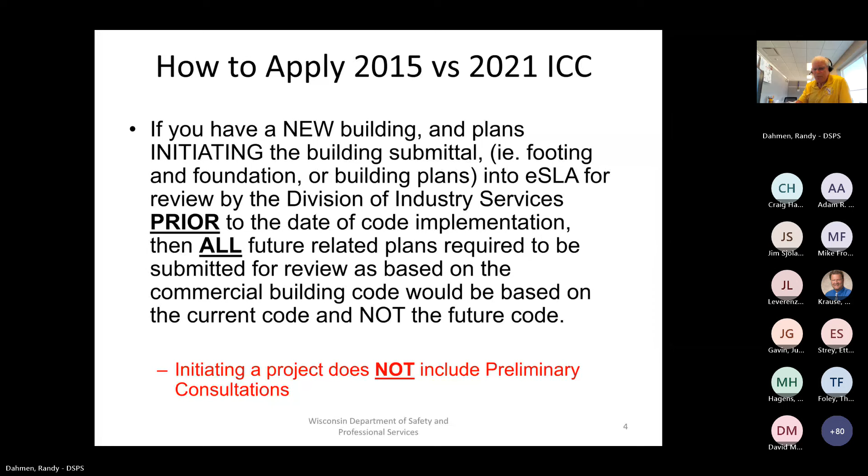As I said, if you get in before October 1st with a complete plan initiating the project, everything that ensues will be under the 2015 code. You can see here that HVAC, kitchen hoods, precast, truss, lighting, fire suppression, fire alarm, even if submitted or addressed at a later time, would still follow the 2015 code.

Now there are scenarios where you have a shell — a simple box. We're going to build a box, not sure what's going to go in it, but we're going to build a box. Those plans, as submitted to the department, will be based on when we receive them, and we'll assume it's 2015 unless told otherwise, if it's before October 1st.

When the building starts getting finished out on the interior to accommodate new tenants, the tenant plans will be addressed by the code in place at the time those tenant plans are received. So if I submitted the building plans for the shell on September 15th, we went ahead under the 2015 code, and we complete our box or shell.

Come December, we got our first tenant and the tenant plans come in. Well, those plans are after October 1st, so those plans fall under the 2021 code. All the ensuing plans related to that tenant space — building plans, heating plans, maybe sprinkler and fire alarm plans, truss, whatever it may be — anything related to that particular part of the project would then fall under the 2021 code.

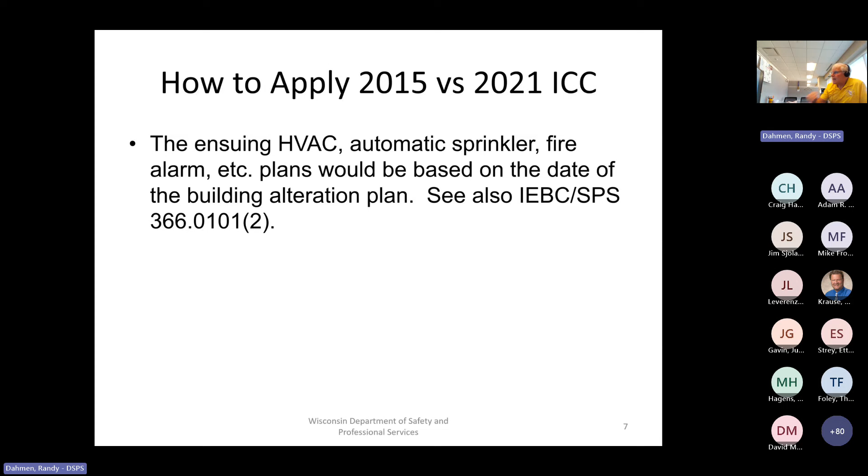Now we still have some situations where you have standalone plans. Like for instance, you might want to change out your heating system — you're not doing any changes to the building, it's strictly a heating system replacement. Or maybe the fire suppression system is going to be modified, or the fire alarm system is going to be updated, say at a school.

So if you have a standalone plan where there's really no building-related or other project related to it — I'll use a kitchen hood as an example, where you're adding a kitchen hood to an existing building — it's a standalone plan. When we receive it, if it's before October 1st, we will assume you want the 2015 code and we'll apply the 2015 code for that review.

If you submit it on October 1st or later, the 2021 code will be applicable. Again, in the month of September, there's this kind of gray area. If you want to go to the 2021 code, you certainly can — you need to identify that when you submit your plans, and we'll review it based on that 2021 I-code.

Now, if you have the code books, if you're not familiar with the I-code books — basically, if you see a solid line, there's some technical changes that were made. It could be big, it could be small, but there was something there to keep your eye on as you open your I-code books.

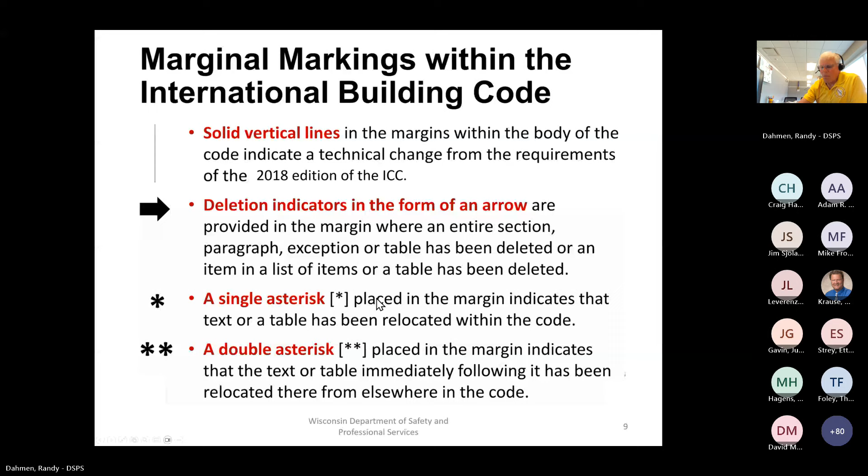As we move into the 2021 codes, you need to have the right materials at your disposal. Depending if you're a building designer, a heating designer, etc., things are going to vary. Of course, you're going to have sprinkler designers, fire alarm system designers, truss designers, on it goes. So the first thing to have is obviously just have the books: 2021 ICC, IBC, all the I codes, and the IFC, the International Fire Code, as referenced.

We'll get into the application of the International Fire Code a little later. The amendments, which we're going to talk about, will be in 361 to 366. I will say a final version will not be available until September 1. You can find preliminaries, but they are just that—preliminary, just like this presentation is based on the preliminary. It is not the final because we don't have a final yet. The department doesn't have it.

It's with the LRB. Now, the next item is the ANSI A117.1 accessible and usable buildings and facilities. I greatly encourage you to get a copy of this. The size of the bathrooms have increased—imagine that, they've gotten larger to create greater accessibility. This is an important issue when designing buildings because most every building has to have a toilet room, with few exceptions. So if you aren't aware of the new size and clearance requirements for bathrooms, you really need to get a copy of the accessibility A117.1 2017 because there's some significant changes in that standard.

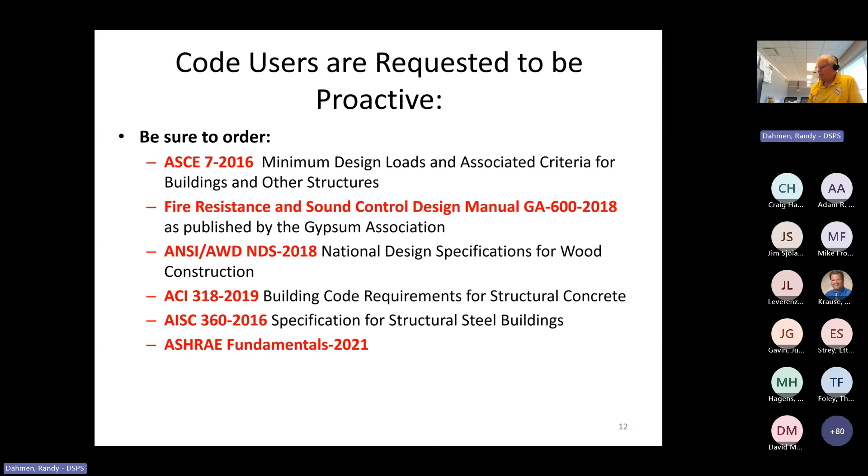For those of you involved in building envelope and insulating a building, we have recognized ASHRAE Fundamentals 2021. So if you're unsure of the R value of a wall assembly or a ceiling assembly, some baselines as to overhead doors and windows and justifications for that - ASHRAE is a wonderful place to go for series parallel methods in determination of R values of various assemblies.

So those are the materials that would be very handy to have. I would almost say essential in some of the efforts that you as designers and contractors perform.

There is some licensing that came with this adoption, directed to those who perform inspections relating to fire detection, prevention, and suppression devices. Typically these licenses have been obtained by fire department officials, so usually a fire department official is not necessarily a commercial building inspector, but because they go in on their yearly inspections on behalf of the community...

...to verify existing commercial buildings and their compliance - making sure exit lights are lit and properly located, that there's clearance in front of the electrical boards, that the doors have operational hardware, and in some cases verifying fire dampers, smoke dampers, etc., all properly installed and properly maintained.

So this new license under 305-627 provides them the opportunity to verify and do inspections while they're performing their yearly fire verifications, as well as those who are commercial building inspectors who can also verify those various fire assemblies.

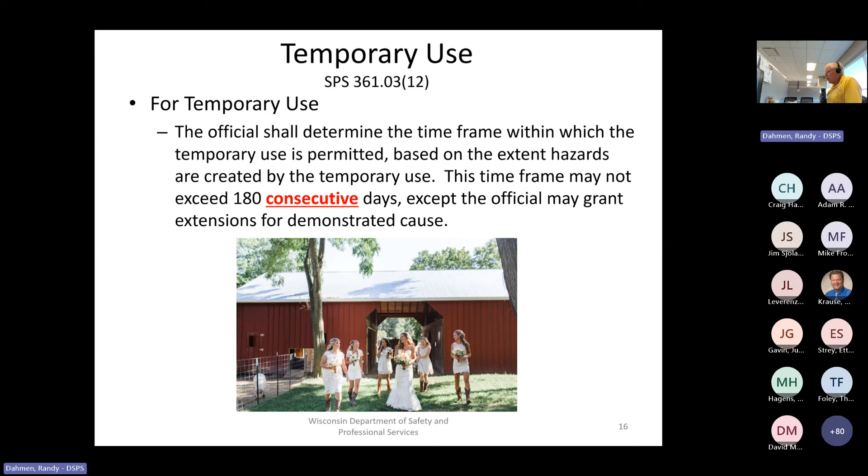The International Fire Code - now, we don't necessarily adopt the International Fire Code per se, but you'll notice I made reference to it. What's important is that if there's a directional signal, and there are many in the International Building Code that reference the fire code, you're obligated to use the fire code if that section says you can.

This is an intermediary location in the code, 36103 parens 14, that before going from the building code and applying the fire code, you have to see if that section of the fire code has been recognized, for instance, as it involves design and construction, or occupant loads, or other sections. So you'll find in the building code, if there's a reference to the fire code, you go to the fire code, find out where that discussion is held, what chapter, and come back to this section to see if that section of the fire code is listed. If so, you're obligated to apply the fire code.

I can give you one example for many of you involved in very large warehouses. If you have high piled combustible storage over 12 feet, that's addressed under 413 of the building code, and it tells you to go to the fire code. You'll find that this section does identify that section of the fire code for use in design and construction, and thus design professionals are obligated to design their commercial building to include the design and construction requirements of the fire code. A lot to say there, but hopefully you grasped it.

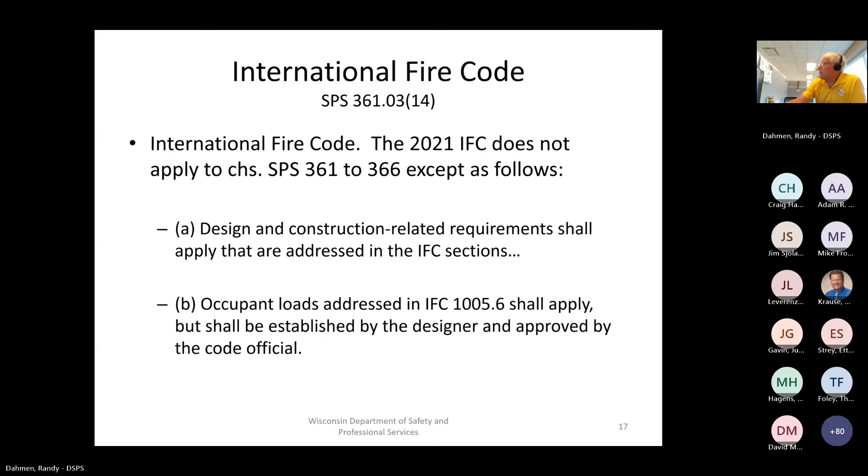Moving ahead, construction inspections and reports shall apply, as addressed in the IFC - remember, that's the fire code - so they're into inspections and reports. Note that the department has added that it may be performed or compiled by any qualified agency rather than by a special inspector. The ICC code has licenses at the national level that they provide for those qualified for special inspections.

Many of you have known that since the adoption of the I-Code since 2002, we have typically omitted the special inspection sections of the code.

Moving into the 2021 adoption, Chapter 17 of the International Building Code, which addresses special inspections, is now included with the adoption of the 2021 codes.

Now, it's always been a chicken or the egg kind of thing - do you create licenses for professionals but not have code language to justify their use, or do you create code language and then work on the licenses on the back side? In this particular case, with the adoption of Chapter 17, we've created the rules, and at this time we will be looking at individuals who are qualified to perform those actions.

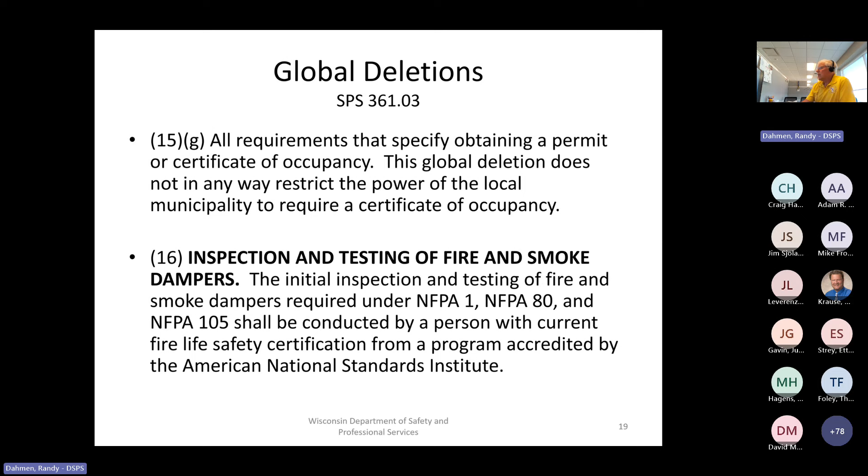Inspection and testing, as it involves smoke dampers, fire dampers, ceiling radiation dampers - all those wonderful dampers out there - are all under NFPA 1, NFPA 80, NFPA 105. It needs to be conducted by a person with current fire life safety certification from a program accredited by the American National Standards Institute, the ANSI group.

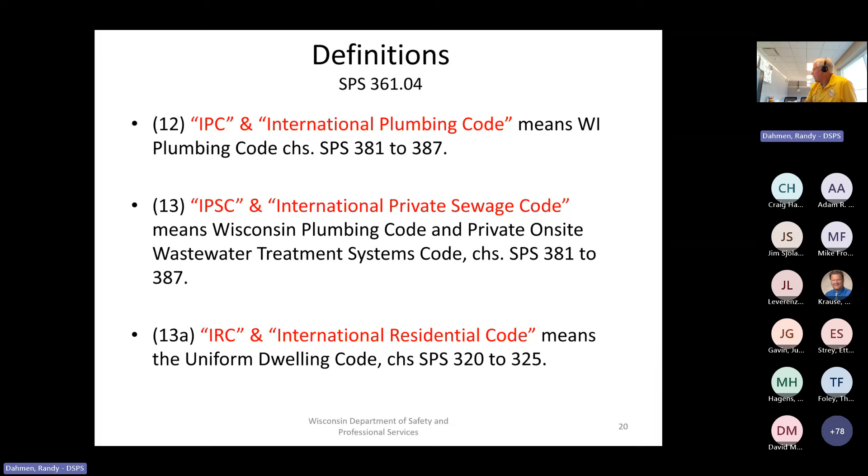Just to clarify, anytime you see in the building code reference to the International Plumbing Code, we don't adopt the International Plumbing Code. So by definitions here in our state and in the Commercial Building Code, we're referencing the Wisconsin Plumbing Code. If you see reference to the International Private Sewage Code, again we're looking at the Wisconsin Plumbing Code and the Private On-Site Wastewater Treatment Systems Code. And if you see reference to the IRC, the International Residential Code, the intent there is to be referencing the Uniform Dwelling Code here in Wisconsin. So just keep that in mind as you review and apply the Commercial Building Code.

Definitions: one of the new pieces of language is modular commercial building element. Many of you are aware of modular buildings. In the past, the state statutes actually had multifamily buildings and commercial buildings separate, and they were treated as two separate codes. Several years ago they combined the two to treat it as one, which is the way we enforce it anyway. Our former language had basically the commercial buildings and the multifamily - they were very similar in that they were almost mirror images of one another. What we did this time around with the building code is we combined them both and expanded and clarified the modular commercial building elements as to what's required, how to address them, etc.

Lastly, multifamily dwelling - we have a definition in our state statute. So rather than looking at the International Building Code, we maintain the law of the state and reference the state's definition of a multifamily dwelling.

361.05 recognizes that the 2021 ICC codes as listed there are to be adopted for use in the state of Wisconsin, and they will be amended by chapters 362 through 366 respectively. So this is where the 2021 gets specifically identified and the fact that the amendments also need to be addressed.

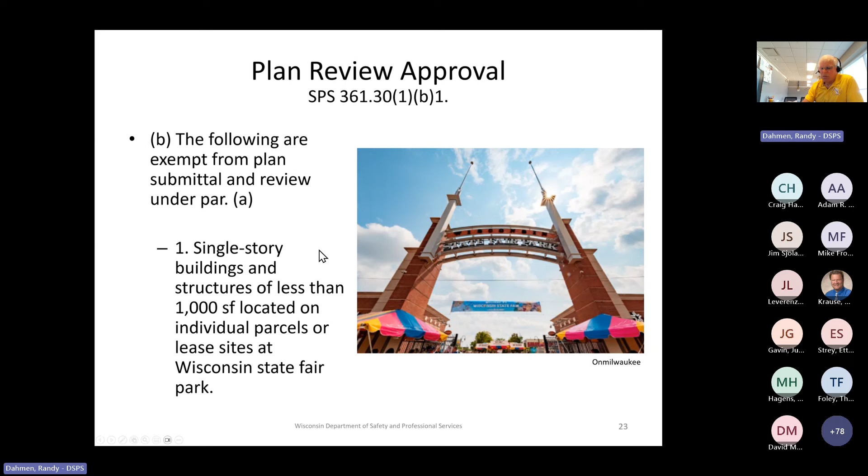Added to those exceptions is the following: a single-story building and structure of less than 1,000 square feet located on individual parcels or lease sites at Wisconsin State Fair Park. In this case, Wisconsin State Fair Park is specifically for the one in Milwaukee. So if you are working on that type of building down in the Milwaukee area, there is now this exception for you to apply for your project.

Permission to start: now, we really haven't changed anything about a permit to start. You still can obtain them. It still costs you $75. You need to submit a plan at the time of the request of the permit to start. It needs to be a complete plan. And note that a permit to start only addresses footing and foundation.

Don't use it to build anything above grade. You can't use a permit to start to put in heating equipment above grade. You can't use it to put in new fire suppression or fire alarm into an existing building above grade. No, no, no - the permit to start is for footings and foundations only. If it doesn't involve footing and foundations, don't get a permit to start because it's not applicable to your particular situation.

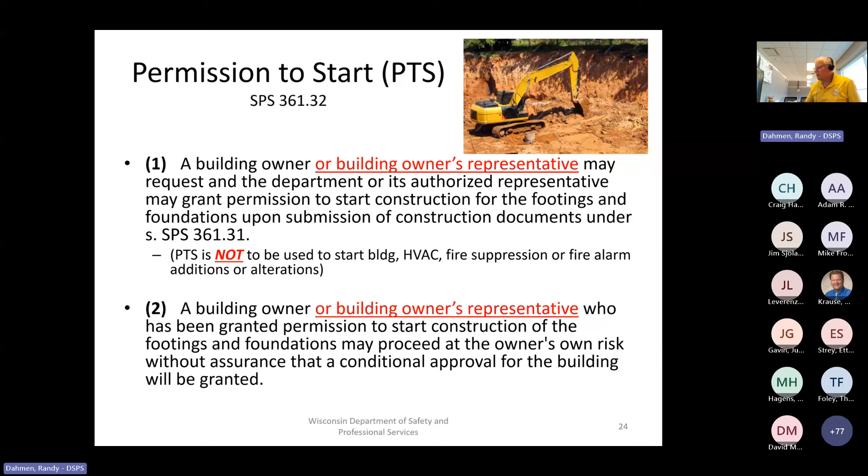A big one for many of you involved in system changes and alterations: instead of getting an approval good for one year, the approval for building alterations and related alterations—HVAC, fire protection, smoke detection, fire suppression—will be good for two years. So we're extending it from one year to two years for an alteration.

Now note, if you need another year, there is the ability to extend a plan for an additional year under 361.36(2). But there's no wiggle room here—you must notify the department before the plans expire. Don't come to the department after the plans expired and say you want to extend the use of this plan. We won't do it because there's no plan to extend—it's expired. You can't extend an expired plan. The important point is we're going from one year to two years for alterations as submitted to the department, starting with the adoption of the 2021 codes.

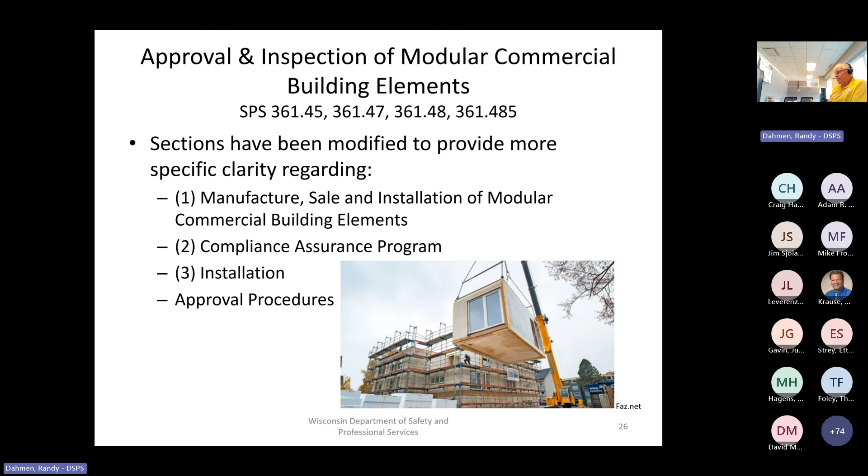You don't have to worry about the rain, 20 below wind chill, or any of the elements that go on the outside—you can build this in the factory. You throw it on the back of an 18-wheeler, get your crane, put them together out in the field, tie them all together with the appropriate fasteners, and you're off to the races. That's the value of modular commercial building elements.

Now when we adopted the 2015 codes, we had an addition that allowed the design group to choose to apply a more modern edition of the international codes. So for instance, if we were in the 2015 and you wanted to apply the 2021, 2024, or even 2018 ICC codes, this section would allow you to do it. Be aware, however, that if you want a more advanced or newer version of the code for application, you may not use any of the Wisconsin amendments—you have to apply the code as written, no exception.

We did have a few of these, that's fine. We clarified what the fees are for using an alternate code, and now we've identified that within the language here in the administrative portion of Chapter 361. So as you see, if you want a new approval to go to an alternate standard, the cost will be $1,200.

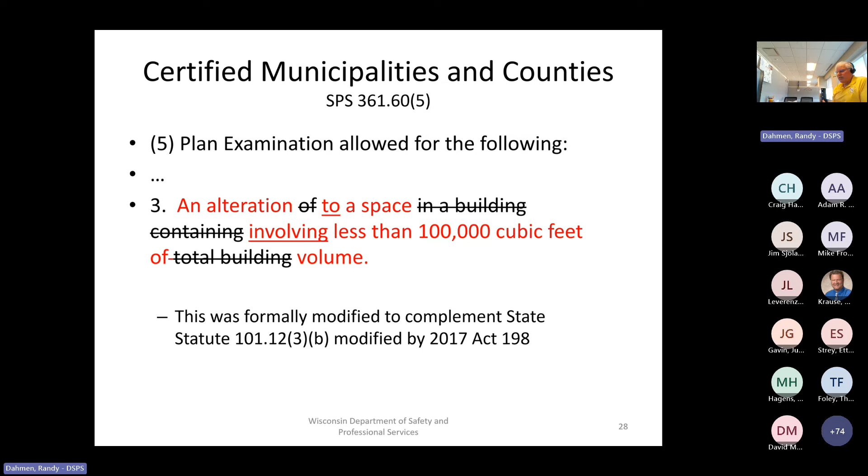The language here says plan examinations allowed. So if you're a delegated municipality, you're allowed to perform plan review as it involves an alteration to a space involving less than 100,000 cubic feet volume. This is to complement changes in the statutes as it involves inspection, and so the language was changed in the administrative code to complement the statutes.

The code now has new definitions for fuel burning appliance, high piled combustible storage, sealed combustion appliance, and a toilet room.

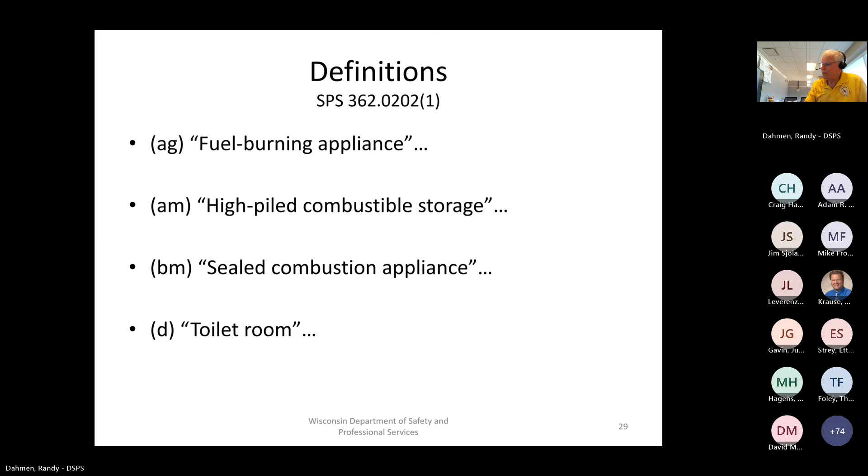There's always been discussion, especially when dealing with fire department buildings. Commercial motor vehicle has the meaning given in state statutes 340.01(8), but does not include a fire apparatus. And you're like, well, what's the big deal here? Well, if you have a fire department with multiple fire apparatus, a lot of fire trucks...

If you treated it as a commercial motor vehicle, then under 903.2.10.1, it would require that the building be sprinklered at 5,000 feet of fire area. If you exceeded that 5,000 foot fire area threshold, sprinklering would be required. Because of the recognition that the fire apparatus is not a commercial motor vehicle, that fire area could be as large as 12,000 feet without being required to be sprinklered. It takes on the persona of a general vehicle rather than a commercial vehicle. So that's the value of that particular definition.

Aircraft hangars, now we clarified the surface in those buildings. Floor surfaces shall be made of materials allowed by 406.2.4. And I'm sure you probably don't remember what it is, but in general, it requires that concrete or similar approved non-combustible, non-absorbent materials be used for the floor of the aircraft hangar.

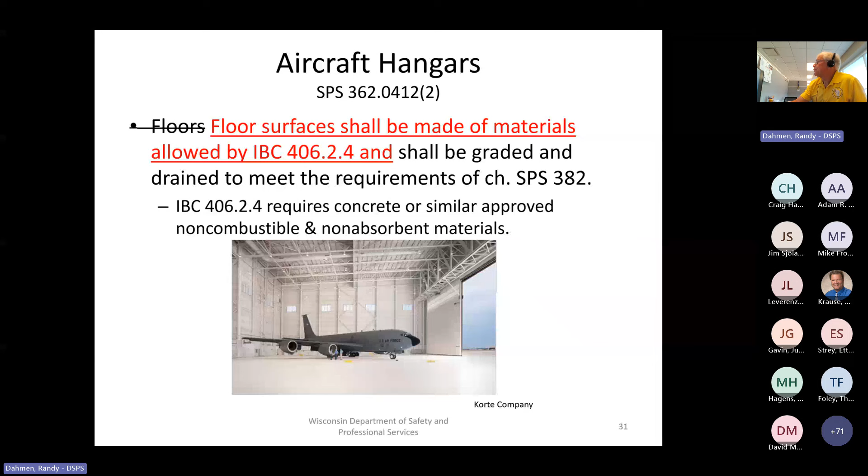This is an important change, and I don't think it's going to change the design at all. It's just a great clarification between the application of the Commercial Building Code and the application of the Uniform Dwelling Code. Again, the Uniform Dwelling Code is for 1 and 2 family dwellings. Once you get to 3, remember that definition of 3 tenants or more becomes a commercial building. Now you're in the Commercial Building Code. There are scenarios where the UDC and the Commercial Building Code butt heads.

I'll give you an example. I have a tavern on the first floor, and I have a single dwelling unit on top. This is very common in some of the old town main streets. Now, the shell of that building is technically under the Commercial Building Code. The finish out of the tavern is under the Commercial Building Code. It's either going to be a business occupancy or it's going to be an A2 occupancy if it has 50 or more individuals.

The upstairs, however, doesn't meet the criteria of a commercial building. The upstairs is not a place of employment. It's a one dwelling unit. So it's not a place of employment. It's not a place where the public egresses or ingresses, like a basketball forum. And there's not 3 dwelling units or 3 tenants in this building. So that tenant space on the upstairs falls under the Uniform Dwelling Code.

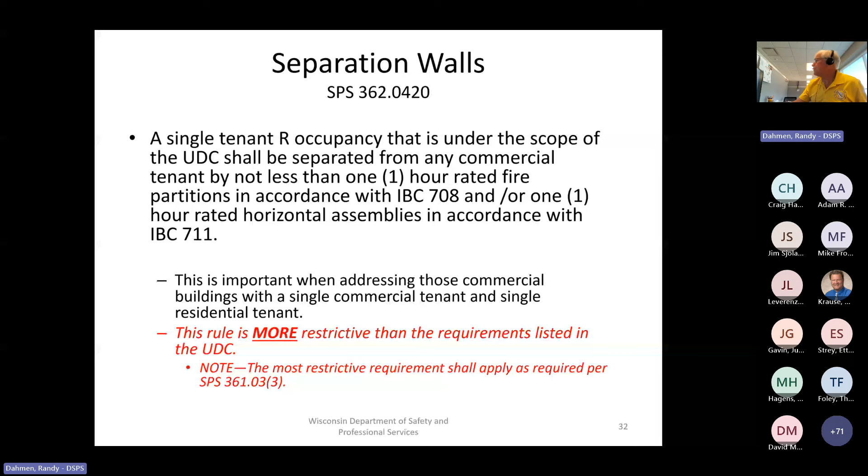We now have added another option for the design community. We've recognized it, we just didn't have it in writing, so we've now put it in writing.

Many times you get a firewall and you don't get a nice 180-degree break at the corner of the firewall. Maybe it's only 90 degrees. Then you have to do something more, and you have to comply with one of the following.

These two are written in the code. The first one talks about exterior walls on both sides of the firewall having at least a 1 hour fire rating with a minimum 4-foot extension on each side.

The second one deals with the idea that you're going to treat it as 2 separate buildings, put basically an imaginary lot line between the buildings, and then apply 705.8 for openings, etc., between the buildings.

Well, this is what's written in the code, and what we did is we added a third option. The firewall can simply be extended 4 more feet in one direction. And you say, well, we already talked about a 4-foot extension.

Yeah, we did, but that 4-foot extension is a 1 hour rating in 2 directions. The firewall we're talking about is going to be at least 2, could be as much as 4 hours, and you're going to extend that 4 feet in any one direction.

So let's see if this picture will help at all. So here's the first example. Here's my firewall. This is an exterior wall here. The firewall ends.

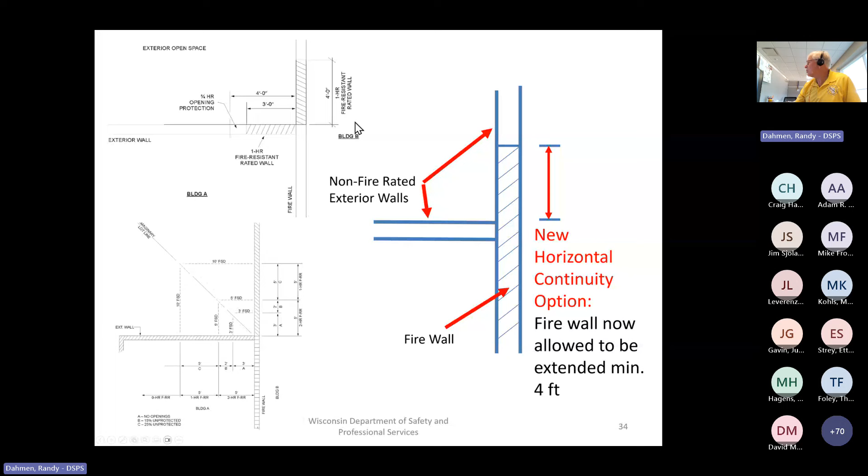I think the design community will like that. It's now been clarified and put into the code, and it'll be a value added, I think, in the big picture. For the heating guys, I haven't left you out.

There's an amendment that's been placed into the building code. It's more of a clarification, because the language just didn't address what's in the IRC—because we don't adopt the International Residential Code, we adopt the Uniform Dwelling Code. And because...

Nationally, row houses, townhouses, condos, and apartments are many times placed in the International Residential Code. We missed out on this and it wasn't in the building code. So we've now included it by Wisconsin amendment.

So if you have a building, say a townhouse, it's 3 stories. I put the furnace on the bottom story, and now I penetrate the floor ceiling assembly between the basement and the first, and then the floor ceiling assembly between the first and the second.

So we've got basement, first, second—3 stories. Well, the code as written technically says you need to have a shaft, even though it's entirely within the same townhouse. There was no exception written in the code. So we've created an amendment, and it says as follows.

Ducts contained within individual dwelling units may connect up to 3 stories without a fire-rated shaft. The annular space around the penetrating duct shall be protected with an approved non-combustible material that resists the free passage of flame and the products of combustion, i.e. smoke.

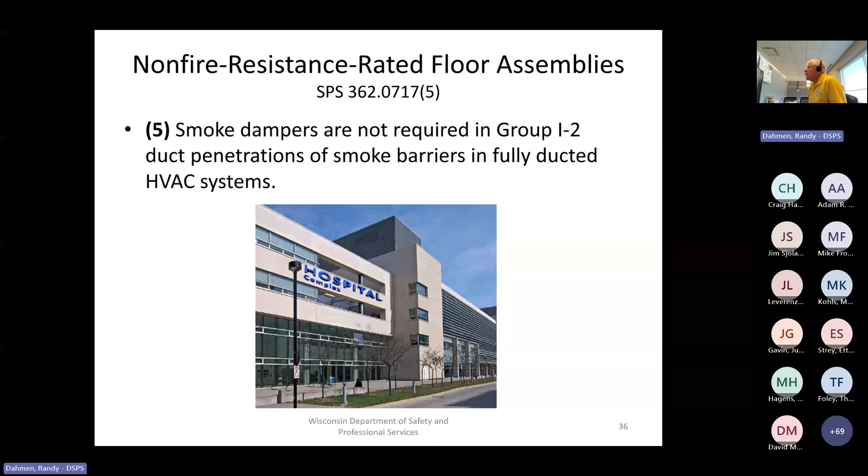Sprinklering language, as you know, we have a lot of amendments for sprinklering, and many of them were driven by petitions for variance. We had numerous petitions for variance involving rural located A2 occupancies, assembly occupancies for eating and drinking. We've also had exceptions for a lot of petitions for residential occupancies out in the rural area where it's very difficult to get the sprinkler system. There's some real challenges there. So we tried to accommodate some of those petitions and just put them into the code so that it's the same and we don't have to process them, and you know what the requirements are. So that's some of the history behind it.

There's also other reasons based on some actions taken here recently. The first one for discussion is the fire area containing an A1 occupancy has no stories that include a level of exit discharge. If you have this situation, you need to sprinkler the building. The fire area containing the A1 occupancy has no stories that include a level of exit discharge, you'd be required to have sprinklers installed. A1 is a performance area, like a theater.

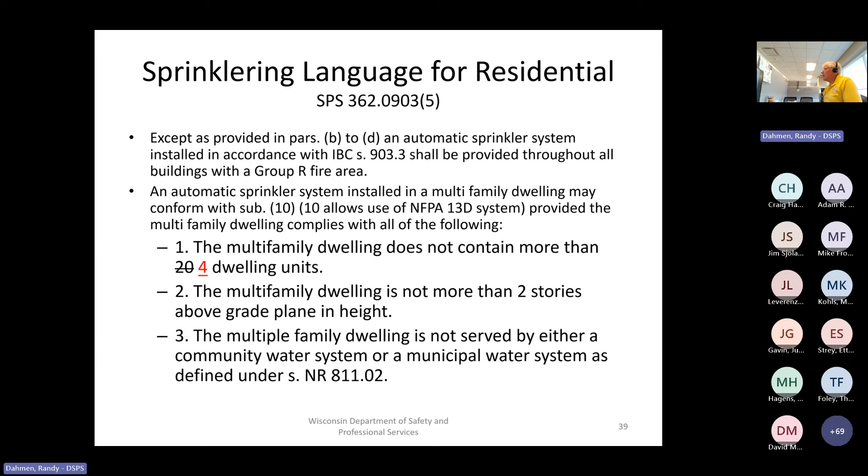Continuing forward, into more specialty types of areas, Group R-3 and Group R-4, Condition 1. Condition 1, by the way, is those areas, kind of a group home of sorts, capable of self-preservation without assistance. Those occupancies and townhouses meeting the separation requirements listed in 1 and 2 below shall be permitted to be installed throughout in accordance with a 13D domestic system. Now the 2 criteria are that a townhouse is 3 stories or less above grade, and that each dwelling unit within the townhouse is separated from other dwelling units by at least 1 hour fire-resistant rated separation per IBC 707, which is the fire barrier section of the code.

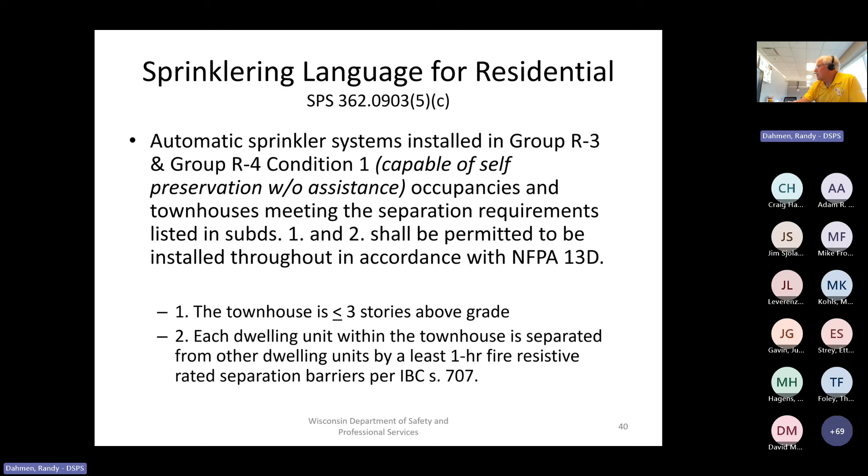There is now a recognition for townhouses. Townhouses meeting the definition in Chapter 2 and satisfying both 1 and 2 below may be constructed without a sprinkler system. Sounds like a good deal. So it has to meet the definition of a townhouse, and then it has to meet 1 and 2. First, the townhouse is less than 3 stories above grade plane - if you're 3, you cannot use this exception; if you're 1 or 2, you can. Secondly, each dwelling unit within the townhouse is separated from other dwelling units by at least a 2 hour fire-rated separation wall constructed in accordance with IBC 706, which is the firewall criteria. The separation wall does not have to comply with the structural stability requirements of IBC 706-2 - in other words, it does not need the breakaway roof and breakaway floor capability of a firewall.

Now, what's important about this is the note attached to it. Note, exceptions to sprinkler requirements found in 101.14 deal with the 2-hour separation of multifamily dwelling units. This section only applies to the sprinkler section of the code and does not affect other sections of 361 to 366. Why is that an important note?

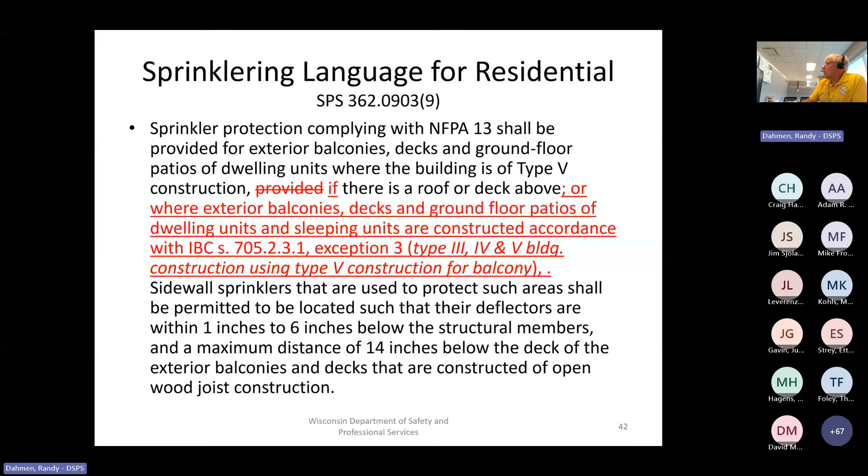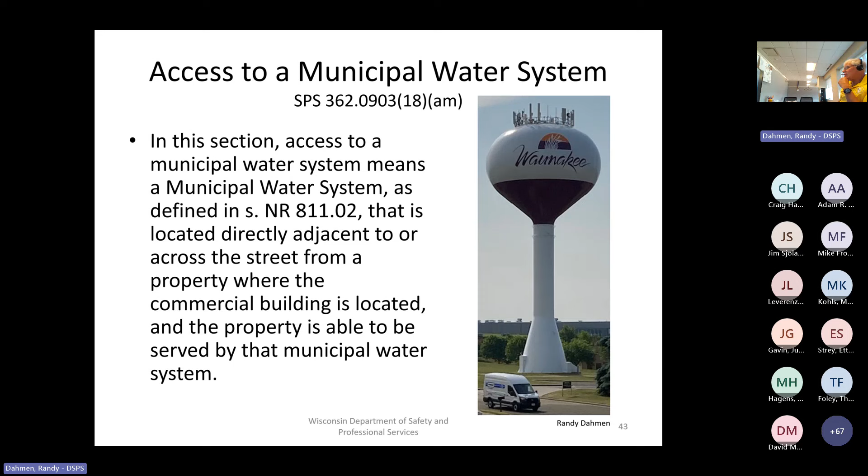For those of you who may not know the definition, there is a lot of discussion about access to municipal water in the code, because obviously if you don't have access to municipal water and you need to have a sprinkler system, that can be quite challenging. So we've defined what a municipal water system is, and if a municipal water system isn't available, we've provided some exceptions and requirements that can be used to meet those exceptions so as to not have a sprinkler system. This gives you some guidance as to what a municipal water system is.

Here's an example for an A2 occupancy. A2 again is eating and drinking. So if you're out in a rural area and you don't have access to municipal water, you might not need to sprinkler if you can meet all of the following. A says the building's limited to a single A2 occupancy fire area, and it can't exceed now 5,000 feet. Used to be 12,000. It's now been changed.

The occupant load has been reduced from 300 to 200. Building height, that language is still the same. Minimum of 3 exits, again, that language is the same. It was added, though, a 5th item: basements and windowless stories must still adhere to the provisions of IBC 903-211. And what that section says is if you have a windowless story, you must sprinkler that windowless story unless you meet one of the exceptions listed in that section.

So that's an add-on. This section is very similar to what it was in the past, but it has been changed, so be aware of it as you go forward with your design. In a similar fashion, instead of A2, we have some exceptions for the group R occupancy if you don't have municipal water.

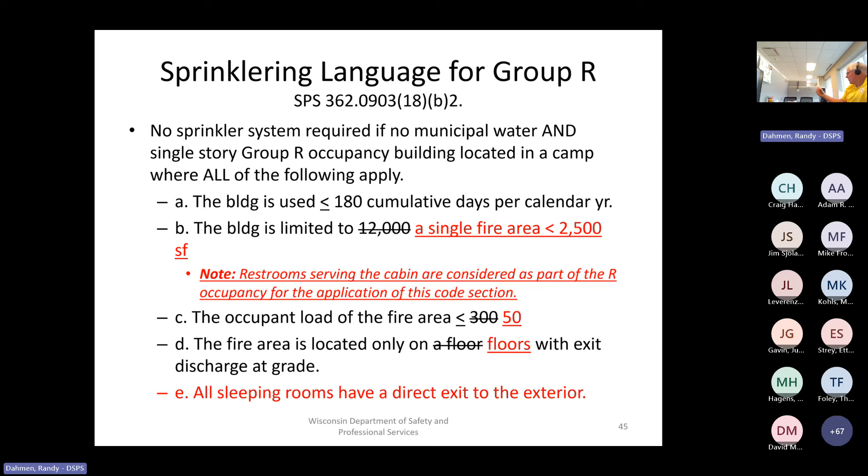The occupant load has changed from 300 to 50. Remember, we reduced the floor area from 12,000 to 2,500, so the occupant load was reduced to complement that. The fire area is located only on floors with exit discharge at grade, and in addition, language has been added requiring all sleeping rooms to have a direct exit to the exterior. So if there's a fire, they don't have to go back into the building to get to the exit - they can leave their sleeping room directly to the outside with a direct exit.

Additional requirements for exempted non-sprinklered buildings with no municipal water. If you choose to meet those criteria with non-municipal water, every one of them has to meet this paragraph C. It's an addition that's commonly missed - I'm telling you, don't miss it, because people like me then have to hold a plan, and I certainly don't want to do that. So this is an addition to the criteria we just looked at, over and above the occupant loads displayed, which isn't a big deal but is important when dealing with assembly occupancies.

All open flames, including smoking, shall be prohibited in the building and less than 50 feet from the building, except for flame equipment used to reheat and maintain food temperatures. Remember, we're not requiring you to put a sprinkler system into the building, so we have some prohibitions we don't want to see. For instance, if a church chooses not to sprinkle a rural building in the field, if they meet the exception, that's fine - but one of the criteria is they can't have open flames. There can be no candles.

Now there's been an addition of a note. In this section, open flame means a candle, solid fuel fireplace, or other similar flames. It does not refer to permanently installed listed fuel-fired heating and cooking equipment that was installed in compliance with all applicable building code requirements in effect at the time of installation. So we've clarified what all open flames means, because there were a lot of different interpretations of the intent. Open flames include candles, solid fuel fireplaces, and other similar open flames.

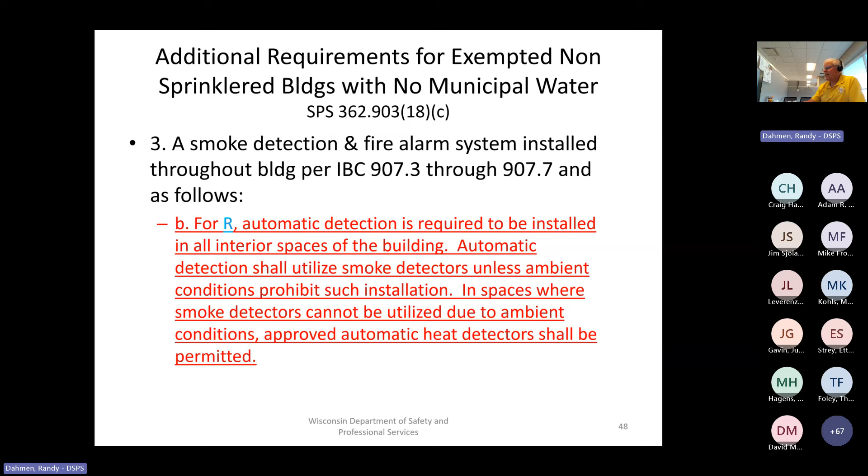Now that was for an A2. This is for an R residential - it's very similar. Automatic detection is required to be installed in all interior spaces of the building. Automatic detection shall utilize smoke detectors unless ambient conditions prohibit such installation. In spaces where smoke detectors can't be utilized due to ambient conditions, approved automatic heat detectors shall be permitted. So again, just providing you some insight and filling in the i's and dotting the t's.

Other items are also required when you choose not to sprinkle the building and where no municipal water is available - you need to have your fire extinguishers.

When the plans are submitted, you need to have a form. Imagine that, the state of Wisconsin with a form. But we do have a form. And that form needs to be signed off by the fire code official if there's no commercial building inspector for the jurisdiction. That sign off recognizes there's no sprinkler in the building, and it also identifies that there is no municipal water available.

Now, if the locals don't feel that's appropriate for whatever reason, the representative, whether it's the building code official or, if there is no building code official, the fire code official, can make a comment on the form and say they don't believe this should happen due to concerns for life safety. That form, as signed by either the building or fire official, needs to be accompanied with your building plan submittal. If it's not there, we'll hold it because we have to have that.

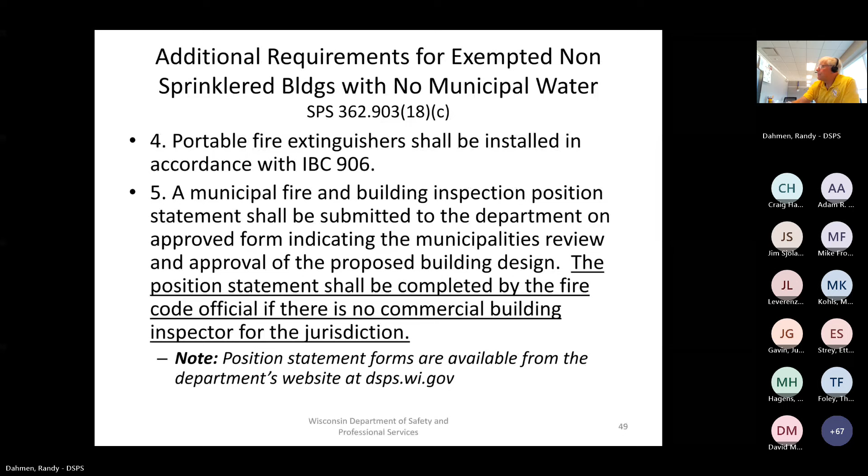Some other items of note that actually reduce the application of the code: stories without openings. Take a basement - a lot of times there's no opening, maybe just a single door on the far end. Code doesn't like that, because the fire department doesn't have access to spray their hose of water should there be a fire event.

There are exceptions where if you have openings around the outside of the story without openings, you would not be required to sprinkler that particular story. We've added another exception that windowless stories with all required exits provided directly at grade, when the story is located at or above grade, would be exempt from needing a sprinkler system. Jim Michak sent me a picture of a recent membrane building - needless to say, they don't have windows per se, but they do have exit doors around the building, and if it doesn't meet the exception written in the code, it might be able to meet this exception.

Woodworking operations - it really hasn't changed anything. It's just to clarify that the 2,500 square feet referenced in IBC 903.2.4.1 is the size of the woodworking area, not the size of the fire area. The fire area could be up to 12,000 feet for a factory before a fire suppression system would be required. Within that 12,000 feet, you could have woodworking occurring in 2,500 square feet without requiring sprinkler. Now, if it's 3,000 of the 12,000, even though the 12,000 is less than the total fire area allowed for a factory, if the woodworking exceeds 2,500, you still have to sprinkler the space. So it's the area in which the woodworking is occurring, not the fire area in which it's occurring.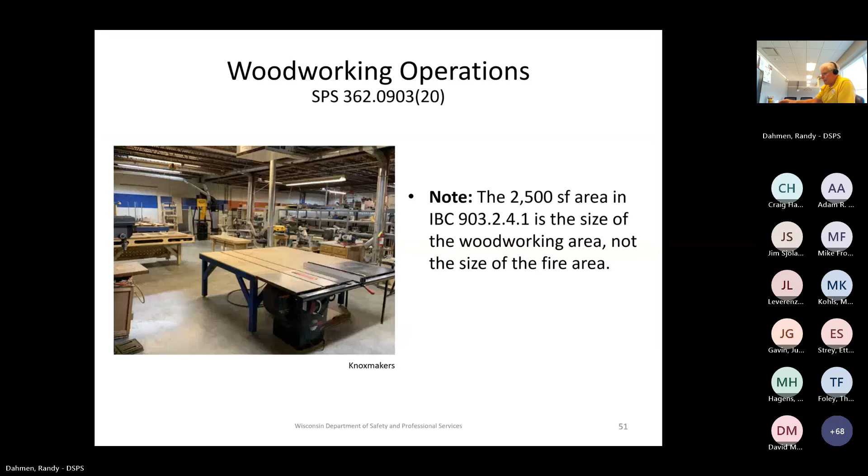We now have language for boat storage, where you take the boats and put them on a multi-layer rack system for the wintertime, out of the water. The language says an automatic sprinkler system shall be provided throughout all buildings containing a Group S1 fire area used for storage of boats in racks where the fire area exceeds 5,000 square feet. There are aluminum boats, but a lot of the boats are made out of fiberglass, so that's going to be an S1, not an S2 occupancy. Yes, it's a motor vehicle, but there's a lot of fiberglass, so we'll consider that an S1. If you exceed the fire area of 5,000 feet, you need to sprinkler those buildings.

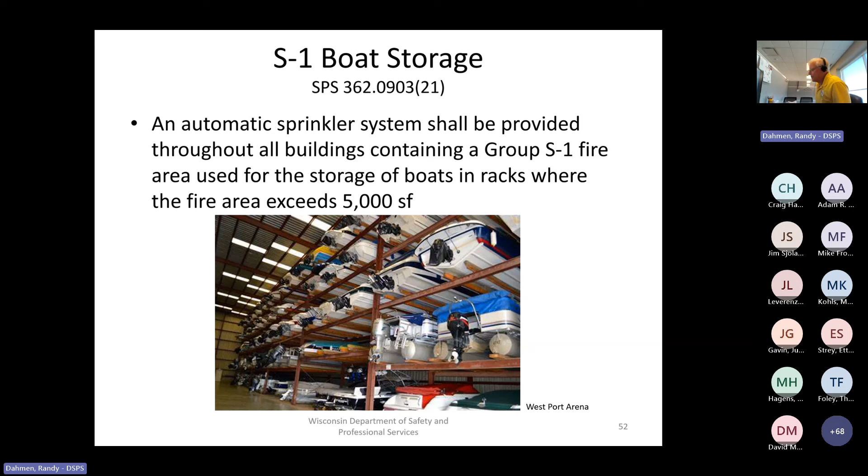Distilled spirits and wine, a topic of my discussions on multiple occasions here in the last couple of years. This will help provide some guidance, especially to the sprinkler side. So let's see how this goes here.

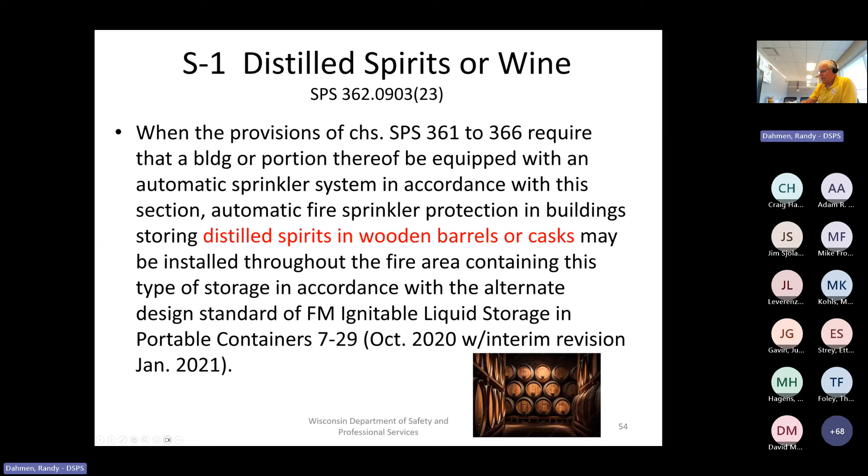Just some background here. NFPA 30, which is adopted through NFPA 13, of course that's the sprinkler code, in this circumstance via the IBC 903.3.1.1. All right, so this is a lot to take in. The IBC gives you a directional signal to apply NFPA 13. NFPA 13 then gives a directional signal to apply NFPA 30. Unfortunately, NFPA 30 does not address within the scope of the standard the storage of wooden barrels and casks in these types of facilities. So this is the reason that the FM 7-29 was adopted for this unique code section.

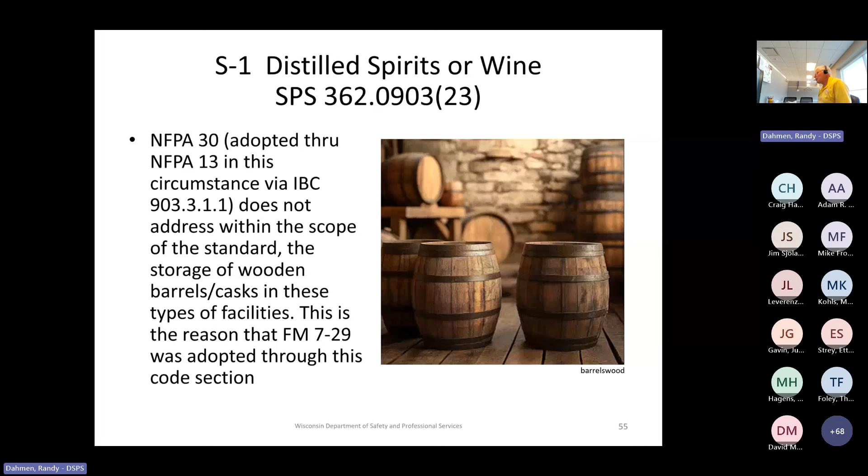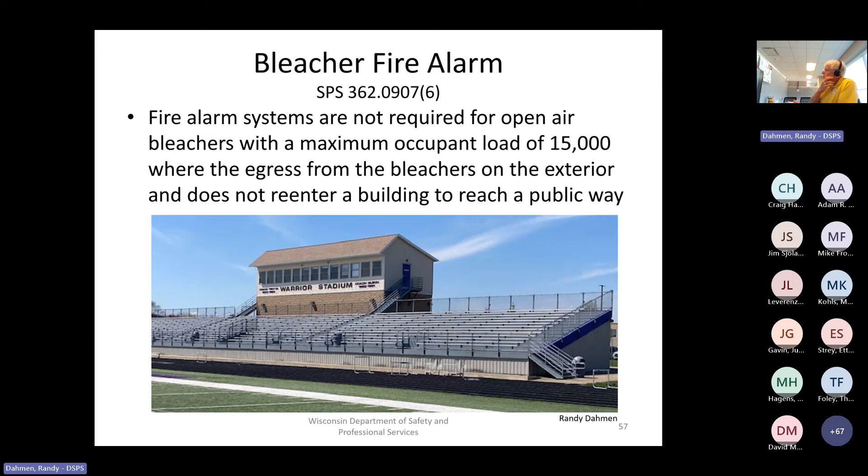Bleacher fire alarm systems are not required for an open air bleacher with a maximum occupant load of 15,000, where the egress from the bleachers on the exterior does not re-enter a building to reach a public way. Now this is my local high school. I took a picture of the football stadium. This is the home side. You can see there's bleachers on both sides. Everything is on the exterior. It never goes underneath the building, never goes underneath the bleachers whatsoever. No fire alarm system required.

As to fire department connections, and yes, there's a lot of references to them in the building code, rather than us dictate it because we're not there, we don't know what equipment they have, we don't know what kind of fire trucks they have and what their attachments are. This is to direct the code designer or the designer using the code to apply and work with the fire chief of the local municipality in which you're going to be placing these connections. That way you know specifically what equipment they have and what will work with their equipment.

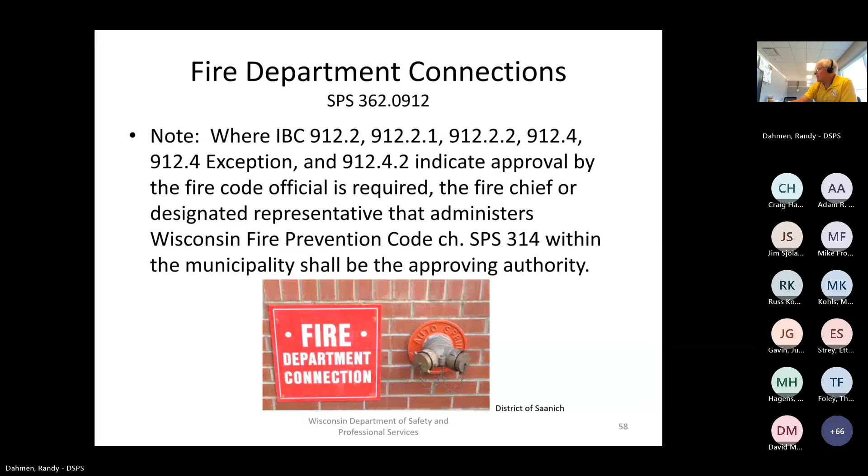How appropriate for the sound background.

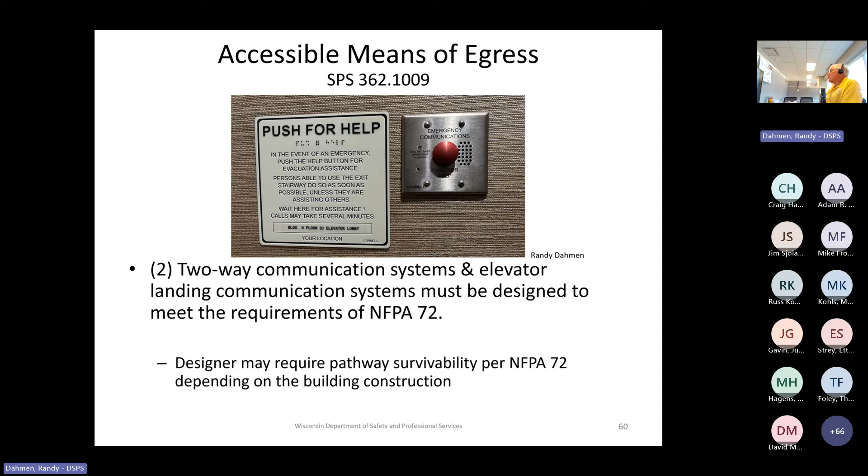Moving from chapter 9 now into chapter 10. Accessible means of egress, in those situations where two-way communication systems and elevator landing communication systems must be designed to meet the requirements of NFPA 72. I took this from here in the building I'm in. If you have emergency communications, those installations must meet NFPA 72. It was not identified prior to this. The major issue at hand is the designer may require pathway survivability per NFPA 72, depending on the building construction. So this is the driving force behind that.

Stairways, got a couple of items. Stairways are always an issue. In this particular case, many times people may choose to put an assisted lift in. Please note, an assisted lift doesn't wash your hands of the need to make accessibility, but if, for instance, you're making alterations in the building, you have disproportionality, so the expense of an elevator is too expensive, and you don't put it in, and you're allowed to go that route through the International Existing Building Code, but you still want to have some of maybe the elderly or some of those who are disabled to be able to get to another level.

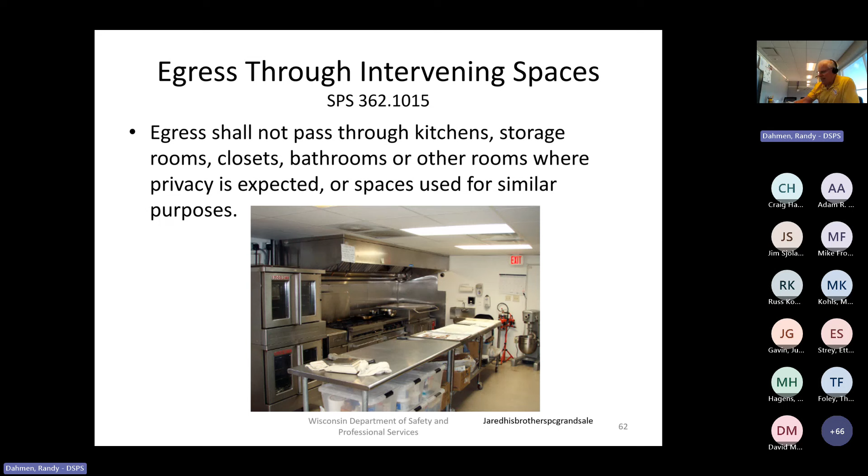I got that online. I'll leave it at that. I was not in Wisconsin, by the way.

Corridor continuity. We've always allowed an extension of the corridor to take in, for example, a little bump out lobby area or something along those lines. But we have clarified it here with the 2021 codes. The language is basically the same - we referenced a different table, but it's really the same table with a different section number. We've added a new criterion for corridor continuity. So if you want to put a bump out space with, say, some couches and a television, the shared wall between that room and the corridor needs to be at least 50% open. If it's less than that, you'll be forced to enclose it. If it's more than that, that's fine, and it'll be considered part of the corridor. Now, if that is a fire rated corridor, that fire rating extends into that living area bump out.

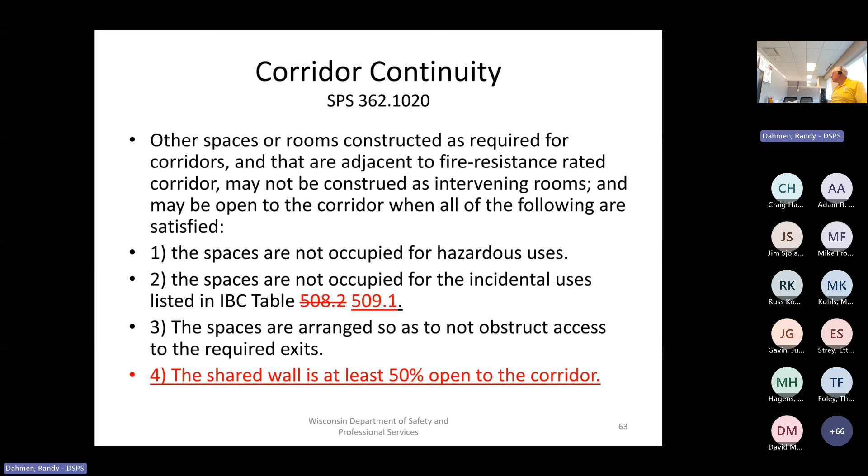Spaces under the grandstands and bleachers - we've codified that the requirements of 1030-111, which requires a 1 hour fire rated separation, shall not apply to open air bleachers that have independent egress to a public way.

Attic spaces - sometimes there are some challenges as to the widths and putting the attic access in, so we're going to work with the locals. Where a fire-rated access panel is required to be installed in a roof framing system that has structural members at least 24 inches apart, the opening width may be less than 20 inches where approved by the department or department representative.

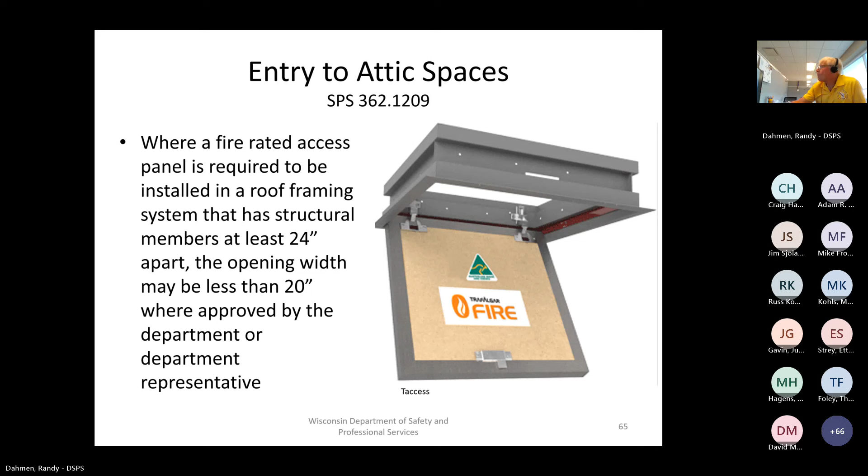Toilets and bathrooms - we've created language to clarify that a toilet room shall contain a lavatory and a water closet. Many of you have probably attended training here that I've performed on toilet requirements as it involves commercial buildings. One of the big issues at hand is there's language under SPS 362.2902 parens 2A, and it talks about the need that a lavatory, a sink, must be in every toilet room, or at least one sink must be in a gendered lounge. For instance, high schools and elementary schools like to have the sinks in an open area so they know the kids aren't messing around, or for small kids just to ensure they're properly washing their hands for hygiene purposes. Well, the code also still respects privacy. So in those circumstances, take a school - you would have your toilets and urinals as appropriate for your men's or ladies' room. You have to have at least one sink in that gendered area where privacy is ascertained. Now, if additional sinks are required by code, you could place them in an open area, but at least one has to be in a gendered area.

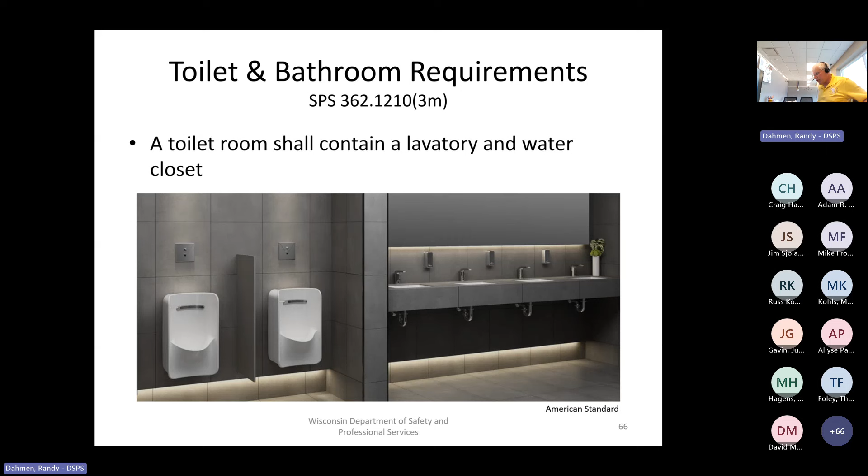There's been a lot of challenges here at the department as it is addressed through the educational systems and what they want, but this is the way the code is written.

Special inspections - here we are. They were previously exempt and now are included for use with the 2021 codes. Now, this section now requires that the supervising professional designer identify third parties to perform the required duties. Third parties may not be the designer of record, an on-site contractor, or the same inspection agency verifying code compliance on behalf of the department or municipality. What's an approved agency? Well, an approved agency is responsible to provide proof of being independent, objective, competent, having the proper equipment and adequate personnel to perform the duties associated with special inspections and testing.

The building official is required to determine if the agency is acceptable. Please note, it's not the building designer, it's not the building owner. The building official is required to determine if the agency is acceptable. Hope I emphasize that. Based on this criterion and provide documented conditional approval.

I want to emphasize the word documented. Simply saying, well, old Johnny, he ran the test, everything was okay, you need to give us that permit for occupancy - that doesn't cut it. It needs to be documented in writing. You need to provide it to the inspector so that he has it on file so that he can justify the issuing of that building occupancy permit if required by his local municipality.

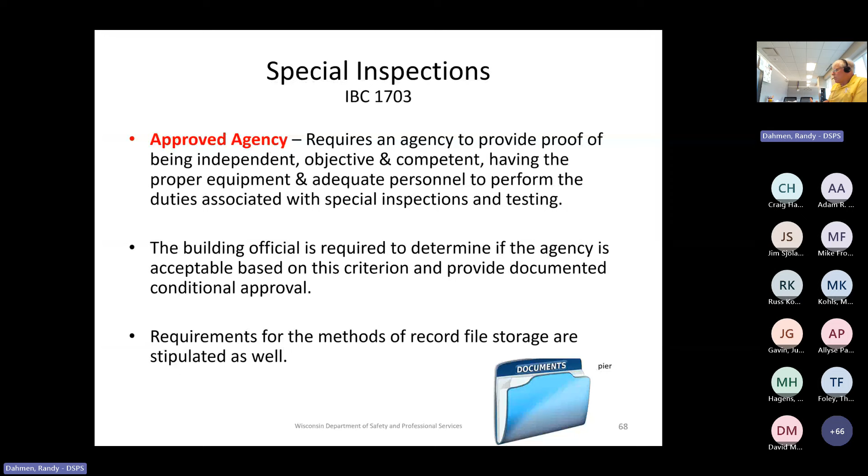From the record storage standpoint, there's requirements for various methods of record storage that are stipulated in the code as well.

Special inspections and tests outlines the inspections and tests required, including frequency and reference standards. Now I'm going to give you an example here. A poured concrete slab would require 8 separate tests. Precast would require 4 separate tests. And note that retesting and reinspection may be necessary if they can't pass the test the first time they tried it - you know, that's the scenario. But it guarantees that the building is properly built.

The one thing I do want to point out, a lot of people are probably a little frustrated in the fact that we haven't done inspections and now they're going to be responsible to at least identify how, when, etc. A lot of this section disappears.

Why? Well, because the state of Wisconsin is not in a high seismic zone. The vast majority of the state of Wisconsin is seismic design category A. And because of that, a lot of the testing and inspection requirements drop away significantly.

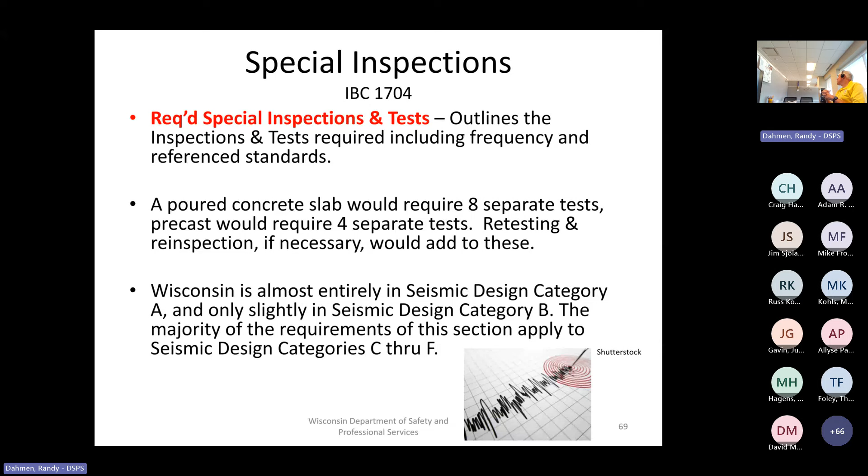Now, in Wisconsin, we do have a seismic zone B in the southeast corner, down Kenosha, Racine, down in that little corner of the state. So if you have a priority building, say a 5-story jail, maybe a hospital, a police department, fire department - if you've got a high priority building in those areas and you have multiple stories for sure, that category B may be applicable for seismic design, and because it's in category B, you will be required to have additional inspections and testing performed.

Now, the importance of this slide, there is some uniqueness to this. I've got the words underlined that I really want to point out. In general, the owner or the owner's authorized agent, which many times is going to be the design professional, other than the contractor, shall employ one or more approved agencies to provide special inspections and tests during the construction as required under IBC 1705.

Approved agencies are to be identified to the building official. Now there are exceptions. In other words, you don't need to take on special inspections if you meet one of these exceptions.

First exception, if the construction is minor in nature. Of course, the question all of you have is, what's that mean? How far can I take it? What is meant by minor in nature, and how do I apply this? We're going to provide some guidance going forward. I don't have all the answers at this time. I told you that from the start. It's a learning experience. Every new code is a learning experience. It's an opportunity to enlighten yourself with all kinds of information, and this is just one of them.

Construction minor in nature is going to be addressed; we'll provide greater details as we go forward as to what that is to apply to. The second exception is U occupancies related to residential. Another exception is cold formed steel light frame construction per IBC Chapter 22, or conventional wood light frame construction found in Chapter 23.

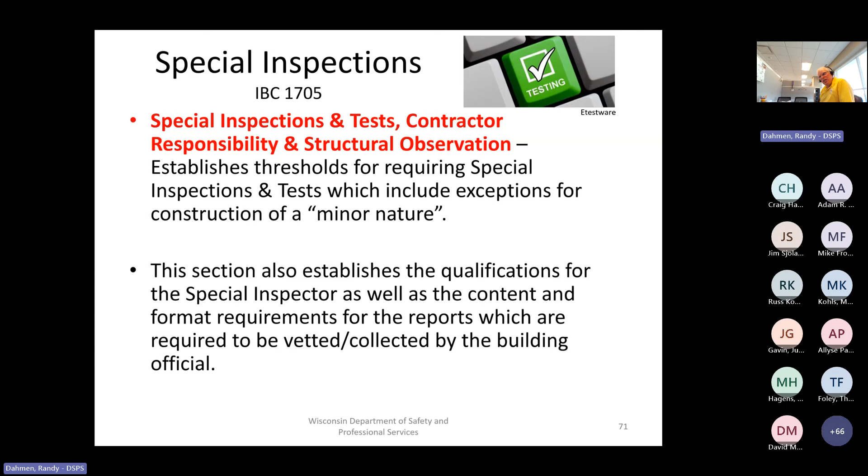This particular section of the code involves special inspections and tests, contractor responsibility, and structural observation. It establishes thresholds for requiring special inspections and tests, which include exceptions for construction of a minor nature. The section also establishes the qualifications for the special inspector, as well as the content and format requirements for the reports, which are required to be vetted and collected by the building official. Again, it'll be the responsibility of those involved with this particular project to ensure that the building official is provided all the required testing reports so that he or she can provide the appropriate building occupancy permit.

Now, what kind of inspections are involved? Those inspections could include concrete, welding, masonry, glass masonry, wood, precast. You see the extensive list here. I didn't say it would include, I said it may include, because it depends. Maybe you're not in that seismic B area, maybe this will fall away. Don't know — it depends, and I know that's not a black and white answer, but it's honest. And you see here at the end, you've got pre-construction load test as far as deflection, wall partition assemblies, exterior window and door assembly, skylights, slope glazing. And again, there are exceptions to those two.

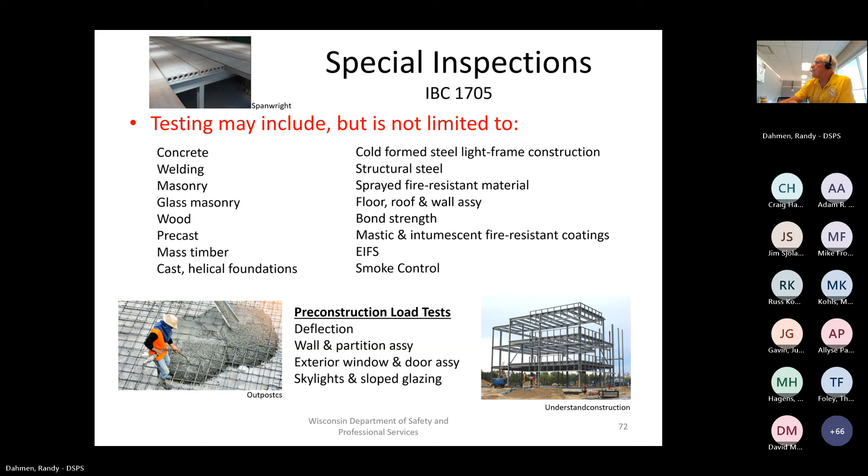This is to clarify those scenarios where you're putting that multi-layer roof up. The vertical leg of any flashing at the base of an exterior wall that includes two layers of a water-resistive barrier shall be installed in a manner that places the vertical leg of the flashing beneath and behind both layers of water-resistive barrier.

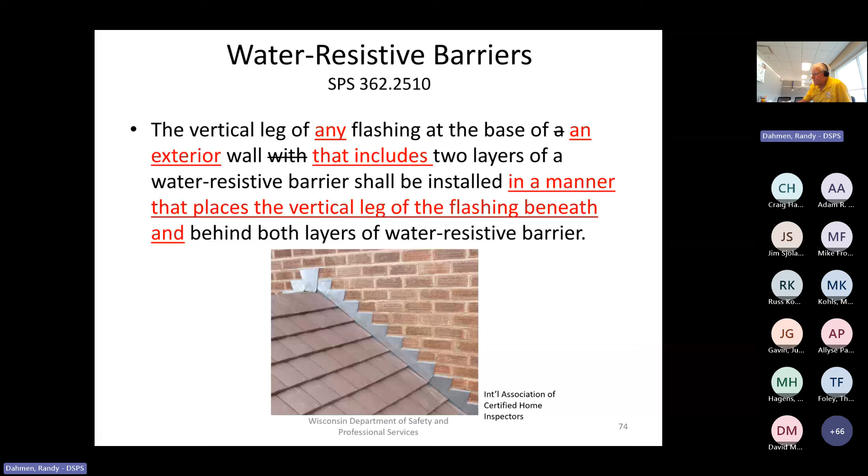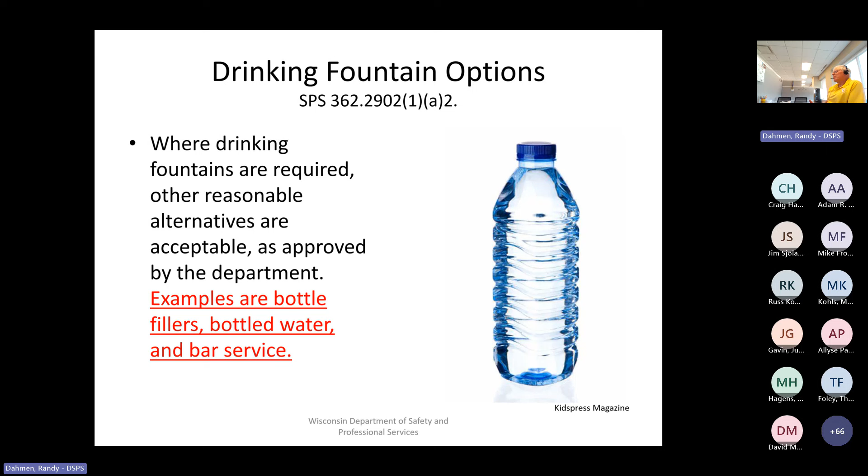Drinking fountain options. This isn't really a change as much as it's to provide clarification. We've always allowed, where drinking fountains are required, other reasonable alternatives as approved by the department. We've helped clarify that. Examples are bottle fillers, bottled water, and bar service.

Public toilet facilities. This came up several years ago. We really didn't have anything to address it one way or the other, so we created a rule to give guidance. The required public facilities - in this particular case we're looking at toilet facilities - must be provided on site or on an adjacent site under the same ownership. This eliminates the justification for use of a 24-hour restaurant facility across the street on property owned by a different individual.

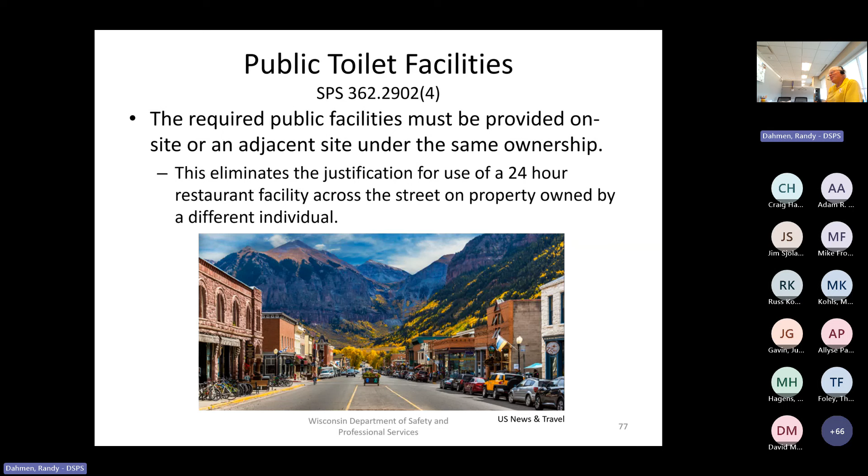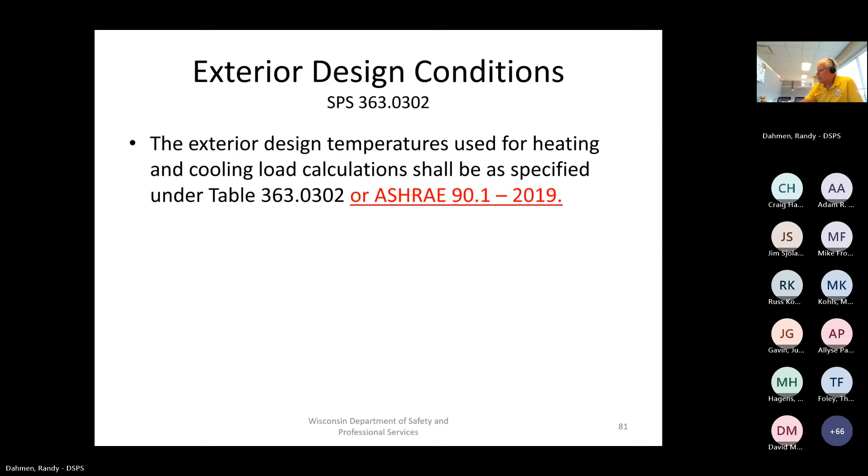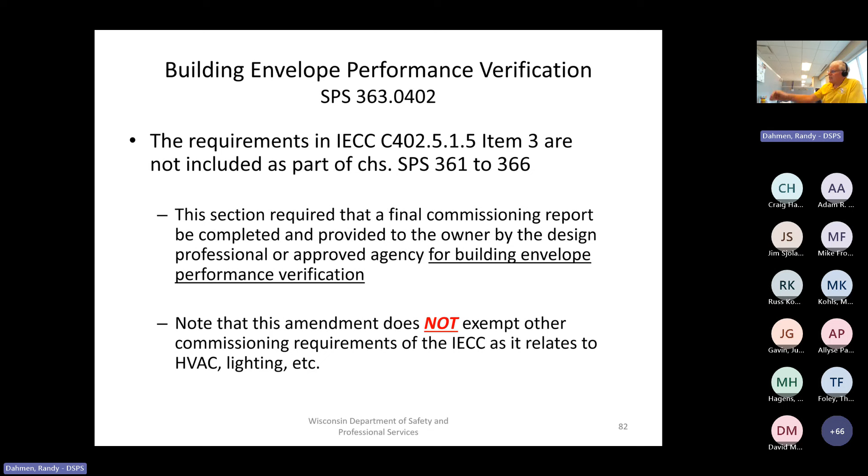Building envelope: in the past, we omitted or amended out the need for commissioning. Commissioning is back in, with an exception on this slide. The code section we're taking exception to required a final commissioning report be completed and provided to the building owner by the design professional for building envelope performance verification. We have exempted that requirement. But note, this amendment is specific only to building envelope performance—it does not exempt commissioning related to HVAC, lighting, etc., as identified in the rest of the IECC. Design professionals may find this helpful in their efforts.

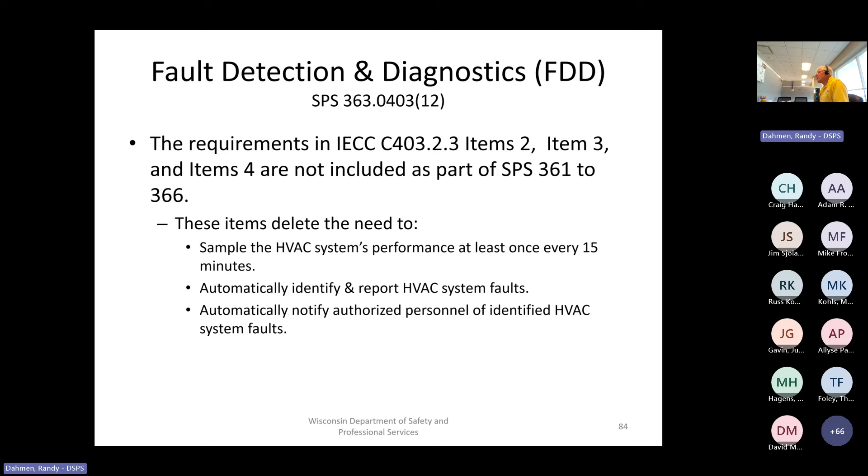Fault detection and diagnostics in the code is a requirement for systems that have an economizer installed. But note, when applying this section, the department has chosen to delete items 2, 3, and 4. What are items 2, 3, and 4? They delete the need to sample the HVAC system's performance at least once every 15 minutes, to automatically identify and report HVAC system faults, and to automatically notify authorized personnel of identified HVAC system faults.

Clarification on duct insulation: there's always been finger-pointing. 'Look, I got a duct up in the attic—see, it's in the building, it's under the roof, it's within the building.' Well, yeah, it is in the building, but it's not insulated. It's just as cold above the insulation on the bottom side of the chord, and your ductwork goes above it—just as cold in that area as it is outside the building. 'Yeah, but I'm within the building, underneath the roof.' Yes, you are. So we've clarified the language.

We added a note: for the purpose of determining insulation requirements, ductwork located outside of the building envelope—for instance, if you put ductwork on the ceiling with insulation blown in at the bottom chord of the truss, and your ductwork goes up and over the top of that—for purposes of enforcement, we're going to treat that ductwork as being located outside of the building envelope. You'll need R12 insulation around that ductwork. That's the intent here.

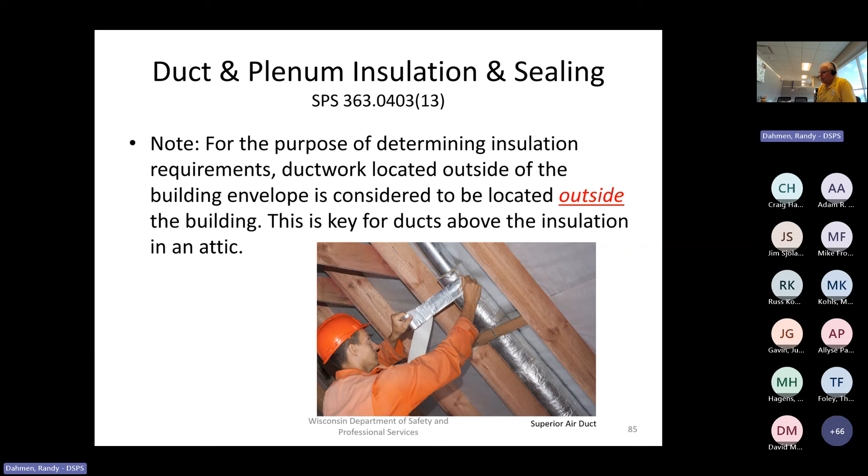A lot of the items dealing with service water heating were eliminated, for a lot of reasons. The State of Wisconsin has eliminated the need for heat traps, since a lot of them are incorporated into the water heating appliance anyway. The appliance also eliminates a lot of the direct user applications, which have now been pushed to the plumbing code, so if you have questions, go to the plumbing code. We also have some recirculation issues identified in the energy code which are now in the plumbing code, so they take responsibility and enforcement of those rules. There's also rules related to pools and spas, and we've relocated several of them in this code package.

Now, one of the major items - we talked about special inspections, Chapter 17, which I consider an important change. I consider this an additionally important change, and those two are probably pretty high on my list of priorities. Formerly, the State of Wisconsin took an exception to Section 406 of the Energy Code, called the Additional Efficiency Package Options, and didn't have to apply it. They are now part of the code and must be addressed by the submitting design professional.

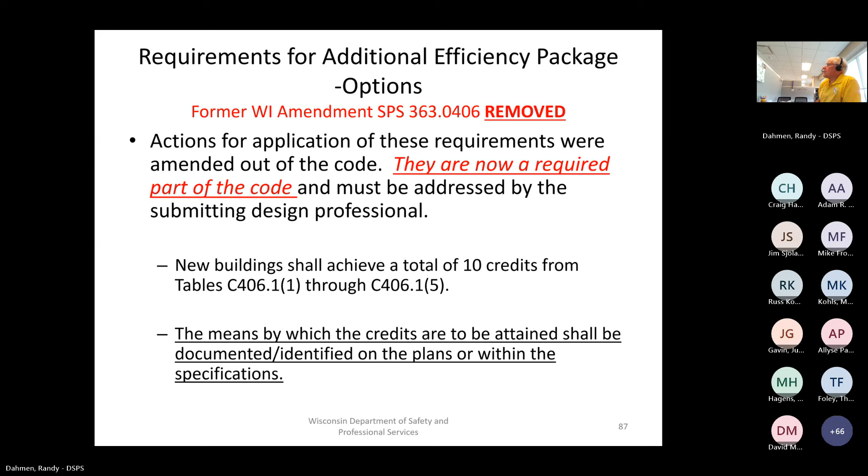Building envelope now will move to the 2021 code. So if you choose to use ComCheck or ASHRAE 90.1, ComCheck will now be the IECC 2021, and ASHRAE will be 90.1 2019. So ComCheck can still be used, and I strongly encourage it - your peers throughout the state, I'd say probably 98% of the plans we have, use ComCheck as a means to demonstrate building envelope compliance.

Similarly, in lieu of Chapter C for commercial buildings, Chapter R is for residential buildings three stories or less above grade. Again, ResCheck instead of ComCheck - ComCheck is for commercial buildings, ResCheck is for residential. It needs to apply the IECC 2021.

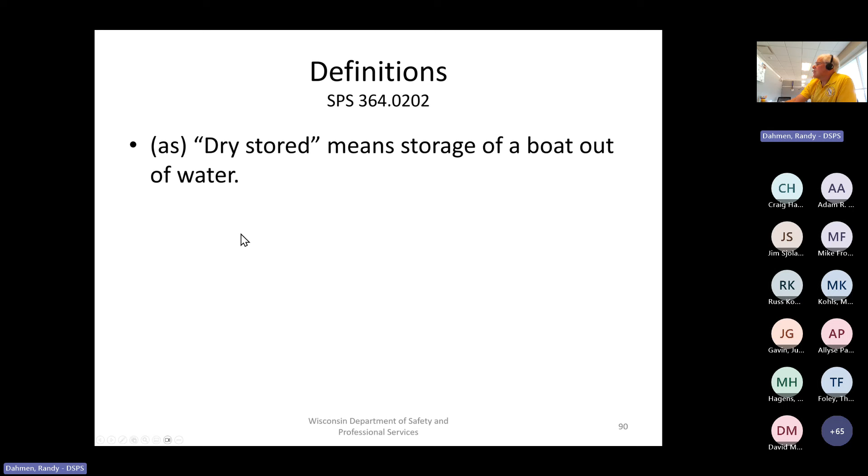Moving now to the mechanical code - the mechanical code now has a definition of 'dry stored,' to identify the use of those boat storage areas we talked about earlier, which was originally addressed for sprinklering at 5,000 square feet. Once you exceed a 5,000 foot fire area, you need to sprinkle. This now addresses the ventilation associated with that and gives some definition.

Healthcare facilities - those of you who work with the Department of Health Services and are involved in nursing homes, hospitals, or specialty clinics, may be required to apply some of the rules from the Department of Health Services. One of those rules involves ASHRAE 170-2017, ventilation of healthcare facilities, referenced in both 3640300 and 3640309. In 3640300, it talks about ventilation requirements related to a healthcare facility. In 3640309, it talks about the minimum temperatures to be retained in those healthcare facilities.

There are some changes to the ventilation requirements. In the past, we've always required natatoriums to have continuous exhaust - you're not going to drain the pool at the end of the night and fill it back up the next day, that's not practical, the water stays there. And if the water stays there, the humidity stays there, so we need to exhaust it all the time. We've always had that natatorium requirement, but now we've added chlorine storage and handling rooms, because if you have chlorine storage or a handling room, that chemical can accumulate and be retained in the space, never getting out, causing a lot of detriment to the building elements, especially anything metal.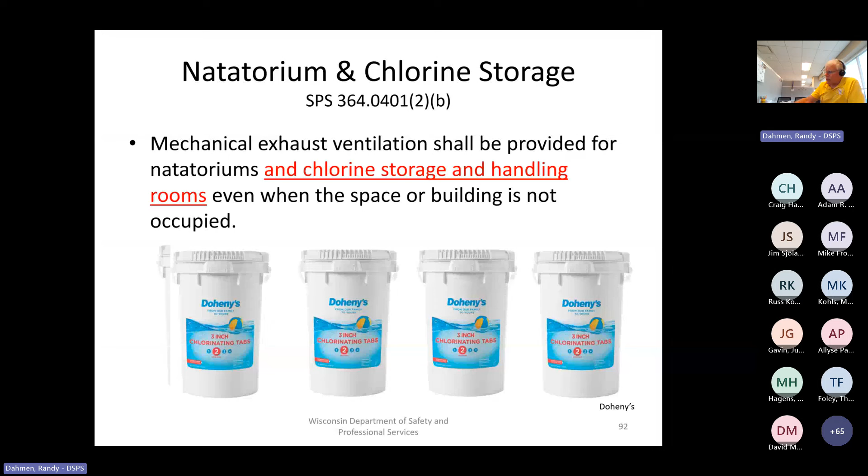Natural ventilation, please pay close attention, we've got some big issues here. For designers, if you have an office space in the middle of a 16,000 square foot building, maybe on the middle of an outside wall, if it's less than 300 square feet, you can use natural ventilation. There should be some happy people out there, you don't have to bring outside air in for those office spaces.

Again, if they're no more than 300 square feet. I apologize, we don't have a lot of discos, we cleared that out. There is now a section addressing ice arenas without combustion engines, less than 100 persons, where now you can use natural ventilation.

Now, FYI, you're probably scratching your head, ice arena without combustion engines. Maybe your kids played hockey, or you watched a hockey game, but between periods they have a vehicle called a Zamboni that goes out and resurfaces the ice. It gets all chipped up from the ice skates, from hockey or figure skating, whatever it may be. The Zamboni goes over the top, resurfaces, and that Zamboni years ago almost was exclusively a combustion engine. Nowadays a lot of them are electrical in nature, and thus there are no combustion byproducts.

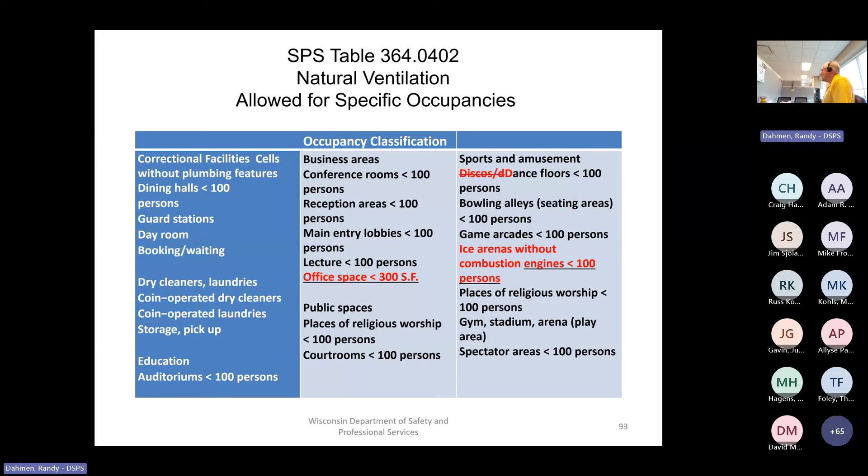This is another issue. Building designers, you think you don't need to know, but I'm going to tell you, you do need to know, because you need to be aware of the new ductwork that needs to come into the building. Heating guys, be aware, you need to put this on your to-do list when you're bidding, as well as your design.

Well, it means you're going to have to do it by another means. Since you can't do it by natural ventilation, you'll have to do it by mechanical ventilation. That means you're going to have a fan and an exhaust, and that exhaust is going to have an outlet to the outside of the building. Mechanical exhaust is now required to be provided for all dwelling unit kitchens. Now, those requirements have been modified to complement that which is in the national code. So dwelling unit kitchens can either have 100 CFM intermittent exhaust or 25 CFM continuous exhaust.

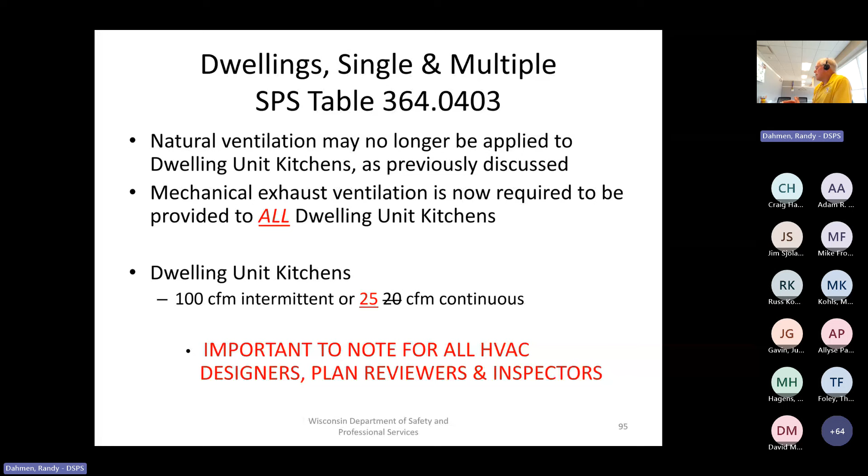You need to be aware where those kitchens are going to be located, because when you start putting those kitchens away from the outside wall, you're going to create a lot of ductwork. Ductwork's not cheap, metal's not getting any cheaper. Work with your designer, see what you can do. Be aware of where you're locating those kitchens.

New ventilation requirement, heating guys be aware. Corridors now need to be ventilated. Every 100 square feet needs 7.5 CFM. Now, many times in apartment buildings, the corridors are fire rated. And in some cases, some people may not ventilate at all under the current code, and technically they're not required.

There's technically a non-occupied area, the corridor. Same thing goes with stairs. We don't require you to ventilate a stair, it's typically a non-occupied area. But under the 2021 code, the corridor will require to be ventilated.

This will be an issue because if the corridor is required to be ventilated, as per IBC 1020, corridors may be required to be fire rated because it's residential if you're over 10 people. Then every penetration to that corridor enclosure will require a smoke damper. And depending on where you orientate it and what exceptions you might be able to meet, just make the assumption you need a fire damper or smoke damper at every penetration of that corridor enclosure that's fire rated.

Only after you can justify that you have an exemption should you think about removing the need for a fire damper or a smoke damper to those duct penetrations.

Nail salon. In the past, as you can see, we had a Wisconsin amendment that kind of softened up the mechanical code a little bit. We said the exhaust inlet shall be located in the work area where, for example, there's a pedicure or manicure going on. So all you had to do is have it somewhere in the work area. It could be on the wall, could be in the ceiling. You might have 7 chairs, you might have it on chair number 1, you didn't have to have it at each and every chair, it just had to be in the work area.

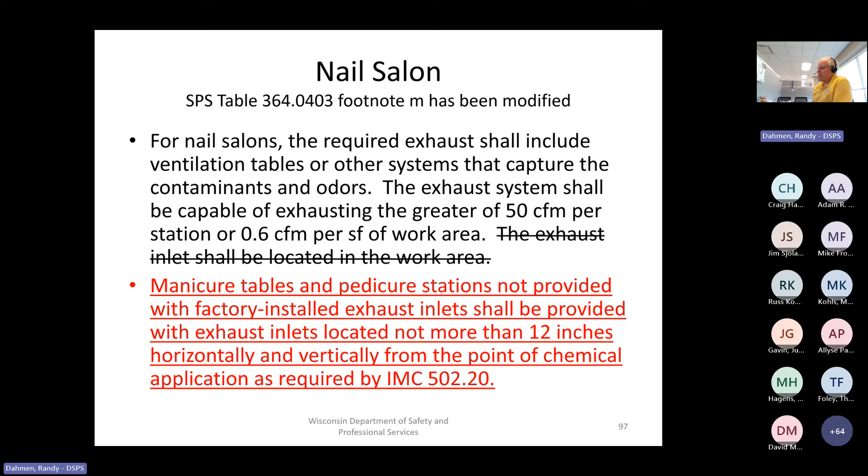Now this is going out the window, that's being removed. We're going to treat it just as it is at the national level. Manicure tables and pedicure stations not provided with factory installed exhaust inlets shall be provided with exhaust inlets located not more than 12 inches horizontally and vertically from the point of chemical application as required by IMC 502.20. So not that there's that many manicures and pedicures, but for those involved, note the change.

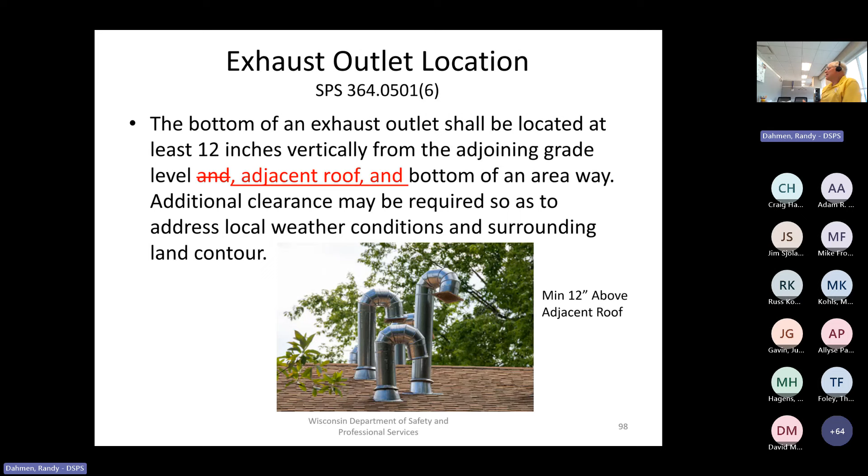For ventilation purposes, we tweaked the exhaust outlet location and added just a bit of wording. It's always been a requirement to be located at least 12 inches vertically from the adjoining grade and the bottom of an areaway, but we're also adding now the adjacent roof. Obviously there's going to be snow on the roof, we want to be at least 12 inches above. Note that due to different weather conditions, you may need to be over and above 12 inches, but that's the code requirement.

Dishwashing appliances. In the past, the requirement for minimum ventilation was amended out of the code. We're eliminating that amendment, and now the code has a requirement for exhausting using a Type 2 hood over dishwashing appliances. That minimum is 100 CFM per linear length of hood, so if the hood is 3 feet, you need 300 CFM.

Now there is an exception to the installation of a hood, there's actually a couple of them. One of them could be a low temperature dishwasher, okay, we need verification of that. It has to be on the plan. I need a name, I need a model, who's the manufacturer, where's the model, what are the installation instructions. Give me, as a plan reviewer or code official, justification that you don't need that hood.

On the other hand, another option is to go to IMC 507.3, which allows loads, heating loads, moisture loads, etc. to be addressed or incorporated into the HVAC system. In other words, you're going to have greater ventilation requirements to try to distribute or remove that, especially if you have a barometric damper on, where you're going to relieve some of the interior air to the outside. You have to give us proof of a system design that provides the intent of the code of 100 CFM for every 1 foot of linear length of hood. Okay, designers, that's on your shoulders here.

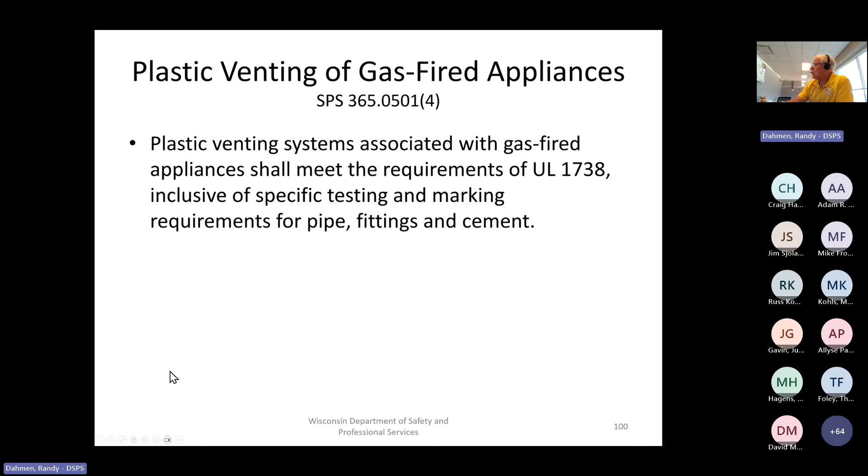It's a special note for direct vent sealed combustion venting. There's been updates to the ANSI Z21.47 standard, which address the use of gas furnace cellular core venting materials—the plastic that you use to extend the intake and vent from a direct vent sealed combustion furnace. As part of the update, ABS and PVC cellular core venting materials no longer

are allowed when in compliance with Z21.47 2022, which went into effect on December 1st of 2022. So if that standard is a requirement of the installation instructions, you can't use ABS and PVC. This is a big issue, because if you put in new equipment, you can't use that type of plastic. And more important, equipment replacement becomes an issue.

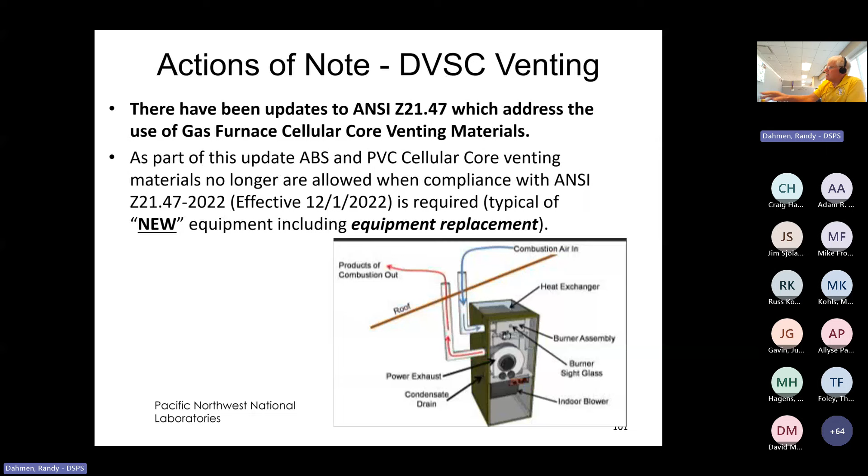You can't simply just put in the furnace and attach the existing system. You'd install it against the listing. The listing says it's no longer viable. So if those original materials are installed in the building today as part of this existing building, and now you get a furnace that says that's not allowed, you've got to take it out.

Where gas-fired central furnaces are being replaced, existing ABS and PVC cellular core venting materials must also be replaced. And my heart goes out to you, because that can be a real dog in an existing building.

Building professionals, be aware what your status is. If you anticipate old furnace equipment being moved out and you're tearing off some walls and you've got that venting in the wall, work with your mechanical guy, let him know so that he has an opportunity to get in that wall and replace with proper plastic venting materials for his new furnace, if indeed they're going with a new furnace.

Smoke detection system controls. Now, this has to do with the Department of Health Services. And what happens is, in our code, we put smoke detection on the return side, right? If you're over 2,000, 15,000, there's a need for smoke detection, unless you meet an exception.

DHS, instead of putting it on the return side, puts it on the supply side, because they want the clean air coming in. They don't want a burning building, which is a wing of the hospital, to spew all their dirty air into the hospital where there's surgical actions being taken and people with health deficiencies. So the building code requires it on the return air side. DHS requires it on the supply side. Okay, so be aware of that.

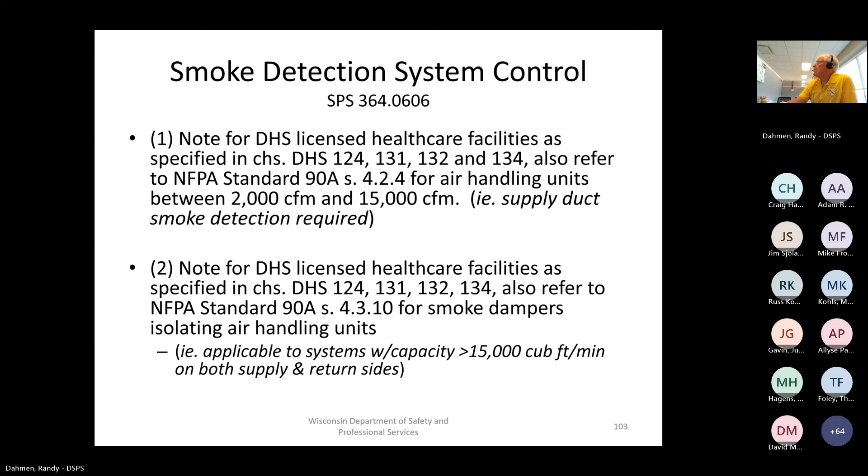As before, we did talk about this earlier in the building code. The mechanical code has it also. There is a printing in both sides because the building code is the primary reference for fire assemblies and protection mechanisms. The mechanical code under 607 does address similar information, but it is a secondary reference. So just be aware of it. That's why it's in both places.

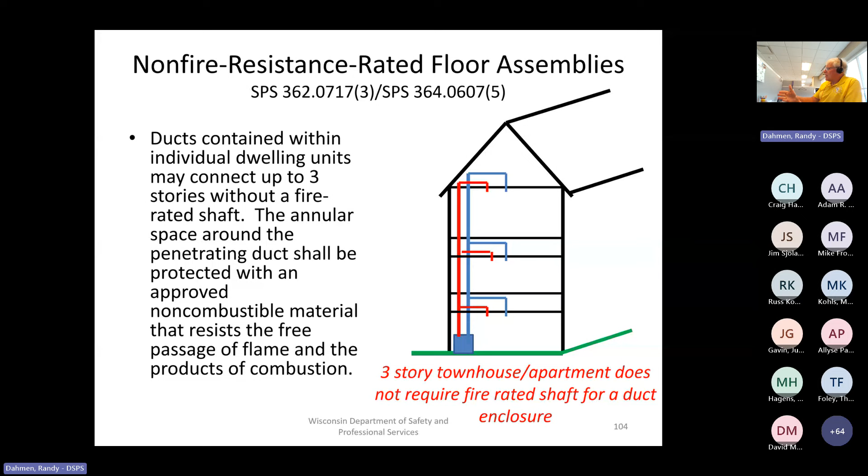Some reference standards: NFPA 45 2019. This is for fume hoods. So if you're going to be involved with a university, which is one of the most common ones, but some research facilities, and you're going to put a fume hood in, I would encourage you to take a look at NFPA 45 2019.

There's been some requirements removed in the International Existing Building Code. The requirements in IEBC 303 are not included as part of 361 to 366. This code section addresses storm shelters constructed as rooms or spaces within existing buildings. Note that storm shelters currently are not part of the building code, and they will not be part of the building code going forward when we adopt the 2021. Thus there's no requirement for it to be installed per a requirement in the existing building code, should you choose to put it in a building that is already existing.

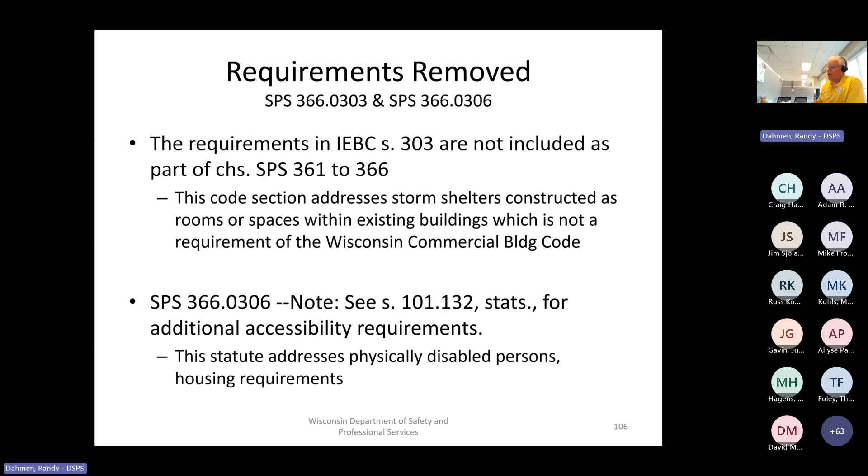The existing building code has taken on a different look. Much of what you knew was in the former code is still in there, it's just in a different location. We formally exempted Chapter 4 for prescriptive purposes, and Chapter 4 is now what is Chapter 5. So we made the change here, you can see the 4 has been eliminated, the 5 has been added for purposes of code enforcement.

Many of the Wisconsin amendments are still there. I do want to point out, if you're looking for 705.2, which is the requirements for ascertaining accessibility in existing buildings, that has been moved from Chapter 7 to Chapter 3. That's a big move because we are all used to Chapter 7. It is now in Chapter 3. So if you're looking for it and think it's lost, I assure you it's not lost, it's just been relocated.

There's another amendment here as it deals with historic buildings. Now in the past, we didn't require any actions whatsoever to be taken for energy conservation as related to a historic building. There's the historic aesthetics, the persona of a historic building, and you don't want to take that out. But on the other hand, we have what I feel were some very viable actions to be taken should you start opening cavities up.

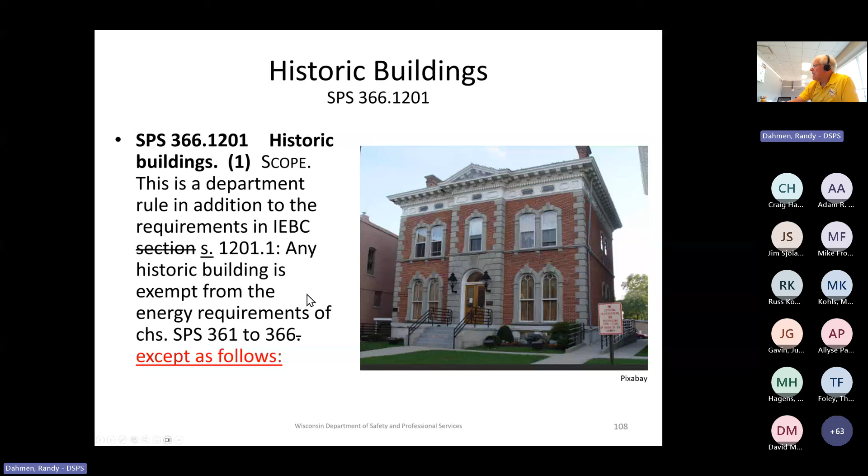So if you have a historic building, if you have existing ceilings, walls, or floor cavities exposed during alterations, they need to be filled with insulation. Specifically this would be the exterior walls and those floor cavities between a conditioned versus an unconditioned space. All replacement skylights, windows, and door assemblies shall meet the minimum requirements of the IECC, unless specifically designed to address unique aesthetics associated with the historic structure and nature of the building. Glass-only replacements in an existing sash or frame are exempt from the application of the IECC.

Basically, what you touch, you bring up to code, but they're going to take an exception here. Take, for instance, a church, and you got stained glass windows. For whatever reason, you're going to take one stained glass window out, and this is an old historic church, and you just remove the window. It says you have to meet code requirements, but we do have the exception here for unique aesthetics. And if you put back in a stained glass window, which very likely is not going to meet any energy code criterion, that could be a conflict, but the language lets you do that. Just let us know so that we can address it accordingly as code officials.

Lastly, roofs without insulation in the cavity, and where the sheathing or insulation is exposed during re-roofing, those roofs shall be insulated either above or below the sheathing so as to meet the minimum insulation required by the IECC. So maybe you can't get 38, 49, 60, whatever it is, maybe you can't get that. It shall provide insulation to the greatest extent possible. So maybe you only have 6 inches, you might only be able to get 6 inches of batt insulation in there. So we'd only be looking for 6 inches of batt insulation because that's all the room you got. It's a historic building.

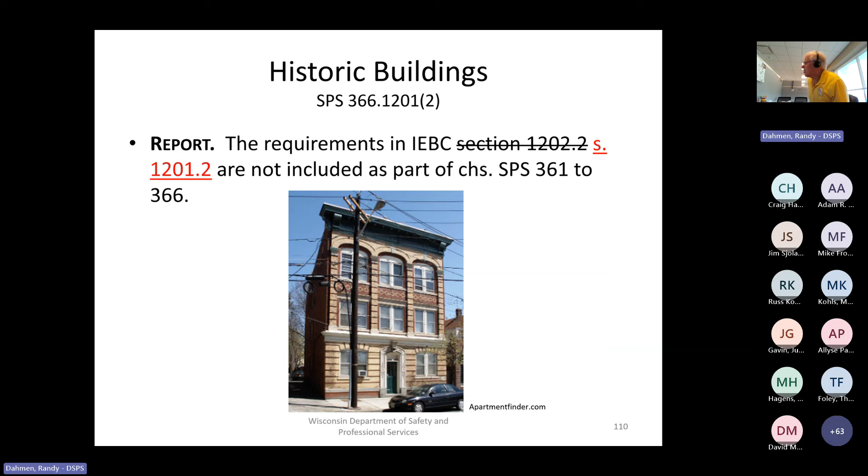This is another important aspect for those of you who may be working on existing buildings, more specifically the historic type building. In general, historic buildings do require a report, but we're exempting that, so we're not going to require that to be part of the code requirements.

Now we've gotten through the main amendments. Let me tell you where you can find information. If you don't have a copy of the 2021 codes, they're free. That's a four-letter word, and nobody's mad. So free is good, free is online. If you go to this code site, codes.iccsafe.org, you will find that you have the opportunity to get in and obtain a view of the I-Codes.

So you go onto the site, you go on the left, you click on iCodes, then on the right of that entry, you click on the 2021 iCodes, and you'll have all the codes shown to you as individual front pages. You click on that code, and you can view the 2021 codes for free online.

Now, on the same site, instead of clicking on 2021, you could get the 2000 code, the 2006, the 2009, or the 2015. You could even take a look at the 2024 if you want to look ahead on this site.

It's free for viewing. Now, these Wisconsin amendments—I will say again, we have trained on the Wisconsin amendments.

We haven't talked about the changes in the code, the written published materials. We've only talked about the amendments. The amendments, what I've addressed today, is based upon preliminary materials. The final version will not come out until September 1st, so don't ask ahead of time because I don't have it.